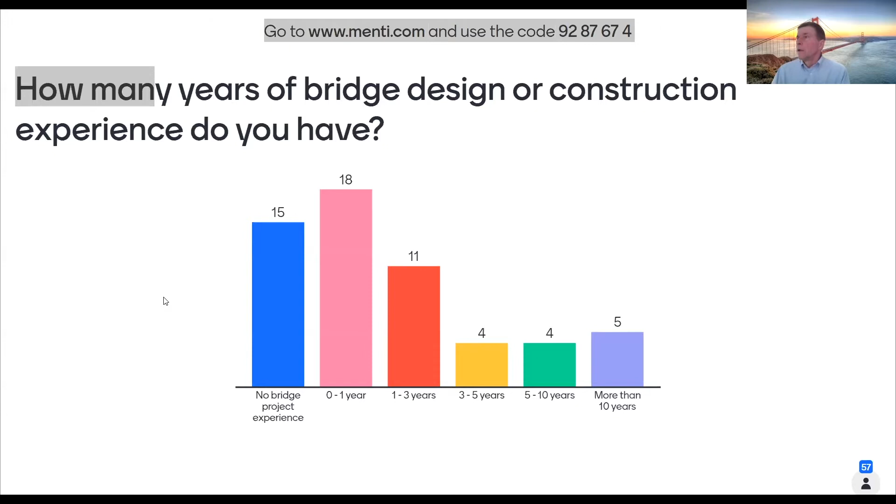So which MnDOT standard specification covers the majority of cast-in-place concrete bridge construction, placement and curing? The key words here are concrete, and also placement and curing.

The correct answer here is 2401, and we're going to be diving deep into 2401. When you get a bridge project, you're going to know 2401 inside out and backwards.

2461 talks about structural concrete, but it talks more about how to make the structural concrete—what are the different grades, what are the admixtures, some of that kind of stuff. There are some curing things that get into that, but the majority of bridge curing is going to be in 2401, and that was the intent of that spec.

So 1517 talks about claims. 2402 talks about steel construction—we are going to be doing that, Nick I believe is the one talking about some of the steel. And 2452 is piling, so those are things that we will be going through.

So again, as you move through the spec book and start doing more on bridges, these are the kinds of things you'll get really familiar with—what's 2401. In fact, you'll be able to pull out 2401.3 G2 and things like that.

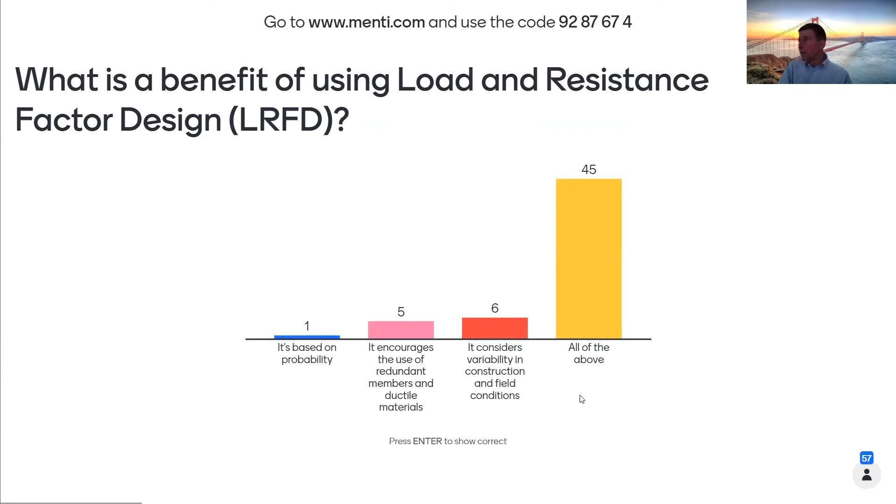What's the benefit of using load and resistance factor design, LRFD? It's based on probability - that's true. It encourages use of redundant members and ductile materials - ductile means it's not going to be quite so brittle. It considers variability in construction and field conditions - yes, that's true too. But the correct answer is all of those. Ben is going to be talking about those later this morning.

Deck pour sequences and construction sequences shown in the plans can be changed without contacting the engineer if the contractor signs off on it - that is false. There is a reason that the plans indicate something; it's there for a reason. If they change it, some things, even construction elevations, might change if you pour the concrete in span 1 and let it cure. Then when you pour span 2, it's going to deflect much differently than if it was non-composite. We'll talk about some of those kinds of things as well.

Which of the following can be used to determine the capacity of a CIP pile - cast in place pile driven in the field? Select all that apply. Pile sounding method - that's just a term I invented, so that's not a real term. MPF12 formula - we will be talking about that, and Andy will go into that. That's the main formula we use in the field now. It's a dynamic formula, and MPF12 is one correct answer here.

Allowable stress dynamic formula - we used to design and control things with allowable stress methods, but we no longer do. That LRFD question from a couple slides ago is some of the basis for this kind of stuff. Pile driving analyzer - yes, that's a tool we now have to analyze as you're driving; you hook up gauges and can tell what the capacity is. WEAP is used before the pile is ever driven, to qualify our pile hammers, so that's not the correct answer, nor is LRFD, which is used in a lot of things but not to control our piles. So the answers are MPF12 and pile driving analyzer.

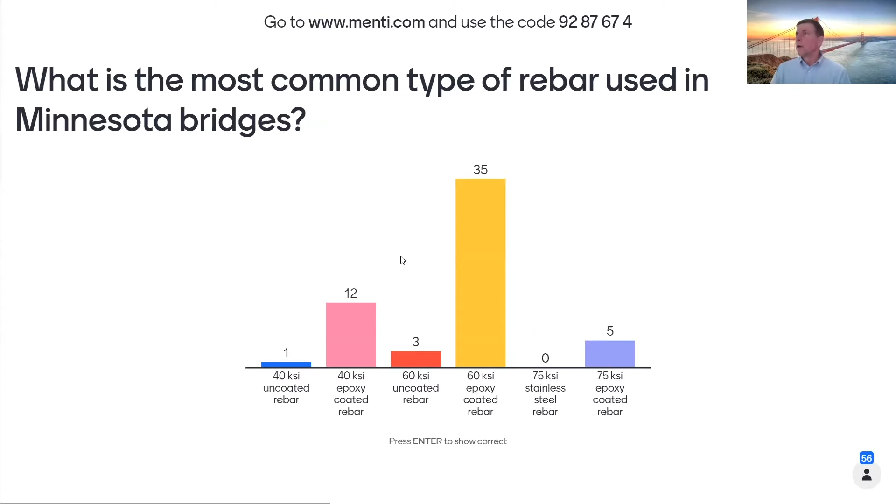For an HP 12 by 53 pile, what does the 53 designate? Okay, so we have length of pile in feet - no, that's not what it is. The HP 12 by 53 is the sectional properties of the pile, and the weight of the pile in pounds per foot is the correct answer here. So an HP 12 by 53, if you think of the H, if you go from flange to flange, that's 12 inches, and then you cut 1 foot of that length of pile, it would weigh 53 pounds. So the other option, the dimension of the pile from flange to flange in inches, is incorrect - that would be 12. And the dimension of the pile from flange to flange in millimeters, no, because if this was a metric designation this number would be 12 times 25 or something, so it'd be a bigger number. So again, HP 12 by 53, the 53 means pounds per foot.

When ambient temperatures increase, the expansion joint opening does what? So we got to think about what's happening to a bridge. The temperatures get hotter, what's going to happen? The bridge is going to get longer, so that's going to tend to make things at the end narrower or decrease. So most got that right, that the joint would then decrease.

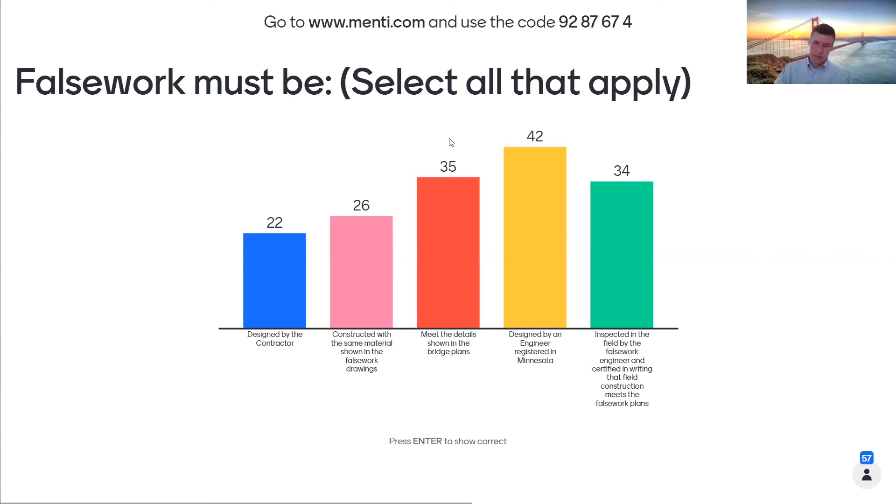Constructed with the same material shown in the falsework drawings - yes, that is also true. The falsework drawings are prepared by the contractor, and so the falsework must be constructed with that. Now this one, meet the details shown in the bridge plans, that is not correct. I suppose it's possible there would be a bridge plan where falsework is shown, but it's almost never, so this is incorrect, the middle one.

Designed by an engineer registered in Minnesota - yes, that is true. So this falsework designer hired by the contractor is someone who is registered in Minnesota. And then the last one, inspected in the field by the falsework engineer and certified in writing that field construction meets the falsework plans - that also is true. So actually the only one that's not true here is the middle one. All the other ones - designed by the contractor, same materials, engineers registered, and they inspect it and sign off on it - all of those are correct.

Which of the following is true for bar number B915E? Okay, so we have different designations, and we will get into this a bit. The B is often, where is it on the bridge. The 9 is the number and the size of the bar. The 15 is kind of a numerical placeholder. So the correct answer is the 9 would be in 1/8 of an inch, so it's 9/8 of an inch. So we know that much. The other thing we know is the E means it's epoxy coated.

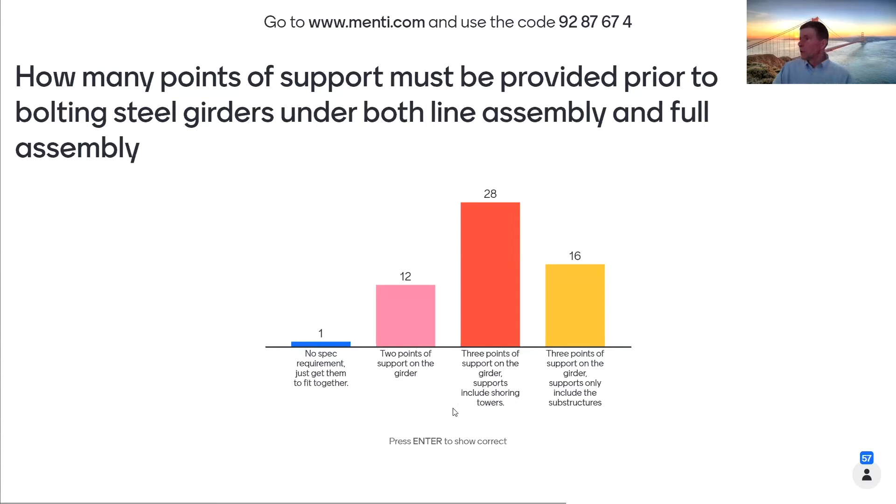MnDOT spec book allows these options for controlling bolt tensioning in the field. Again, select all that apply. Turn of the nut is allowed. It's a method that's been around for years, but it's still valid. You tighten the bolt up to a snug tight fit, and then you go a certain number of turns or portions of a turn, depending on the size of the bolt. Snug tight alone is not correct. You get it to snug tight, and then you do turn of the nut.

A direct tension indicator is one that's used often nowadays. So these two, direct tension indicator and turn of the nut, are allowed. This one, inspector closely observing tightening procedures on 50% or more of the bolts, no, that's still not correct. The spec book allows turn of nut or direct tension. If they're using turn of the nut, I suppose the inspector should be on site to watch their procedures, but by the spec book, that option itself is not allowed.

Field welding can be performed by persons who, select all that apply. They must be certified by AWS for the weld procedure being done, and they must have documented work on similar welds within the past year. All these other options, like more than 5 years welding experience, that's good, but have you done that specific welding procedure? Have you done an overhead fillet weld, or whatever the case may be? Graduated from a tech welding program, certainly wonderful, but you still need to be certified by AWS and have been on 3 or more bridge projects in the past year. If you haven't done the welds, it still doesn't apply.

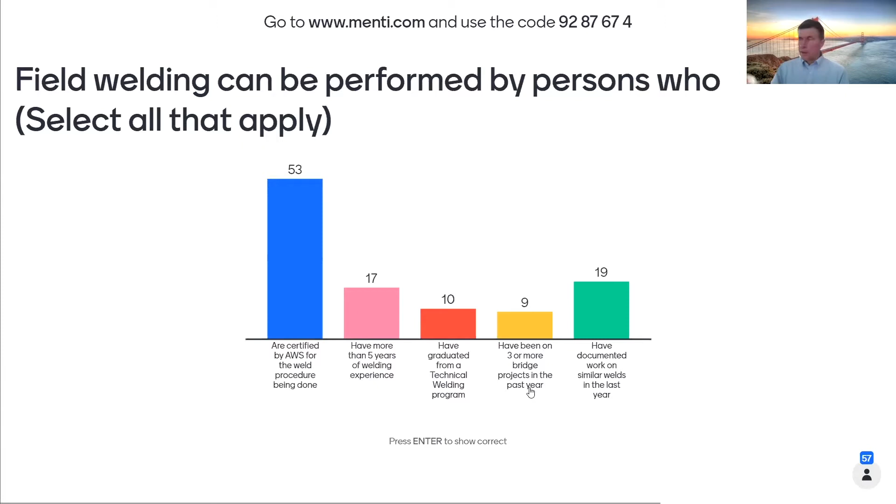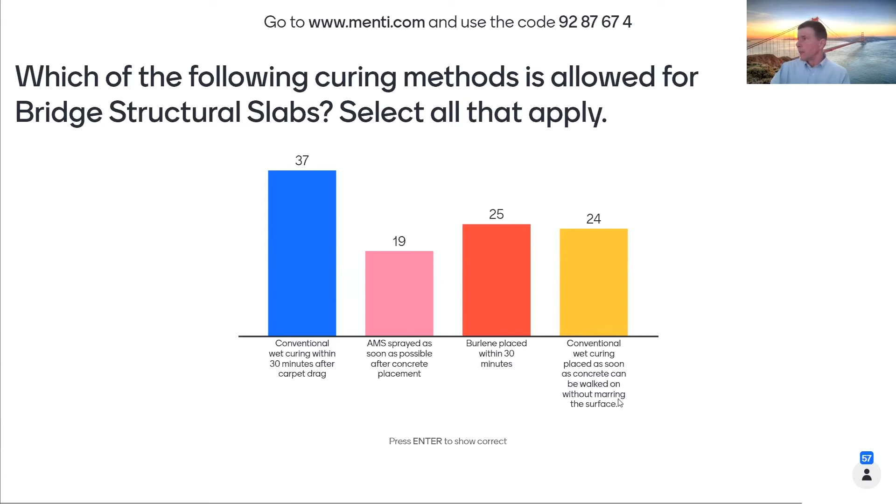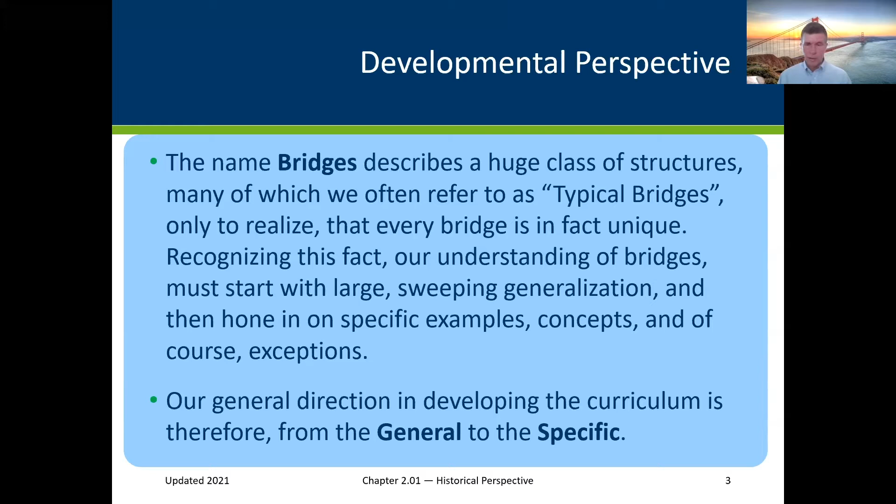So we're going to move from the general to the specific, meaning we're going to talk in general about what a bridge is, then some of the materials, and then concrete - how do you produce concrete, how do you cure concrete. Things like that, so we'll get down into some specifics as we move forward.

Those of us who think back to our childhood - who didn't make some kind of a little bridge over some little trickling stream? So that's the start of a beam span. That's the start of bridge construction.

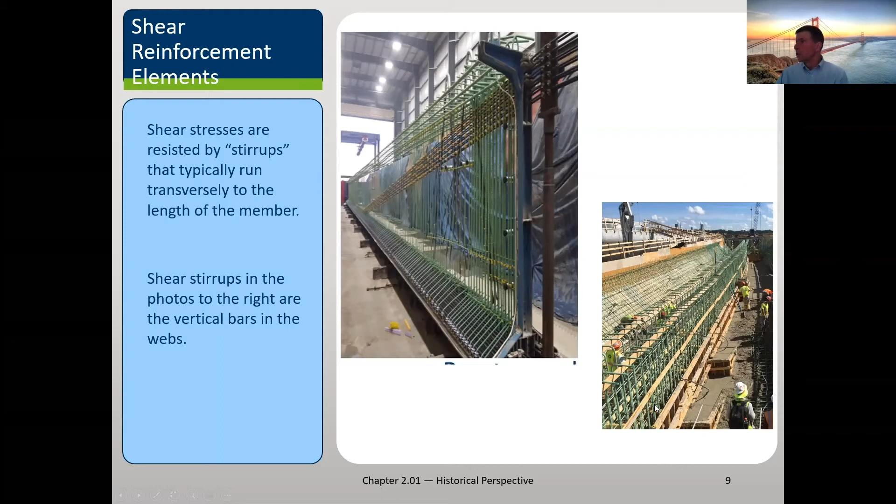Shear is addressed through the use of what are called stirrups. Oftentimes shear would manifest itself by a crack that goes diagonally. These bars that are vertical are called shear stirrups or shear bars, and the same down in the bottom right picture—those bars are also called stirrups or shear reinforcement.

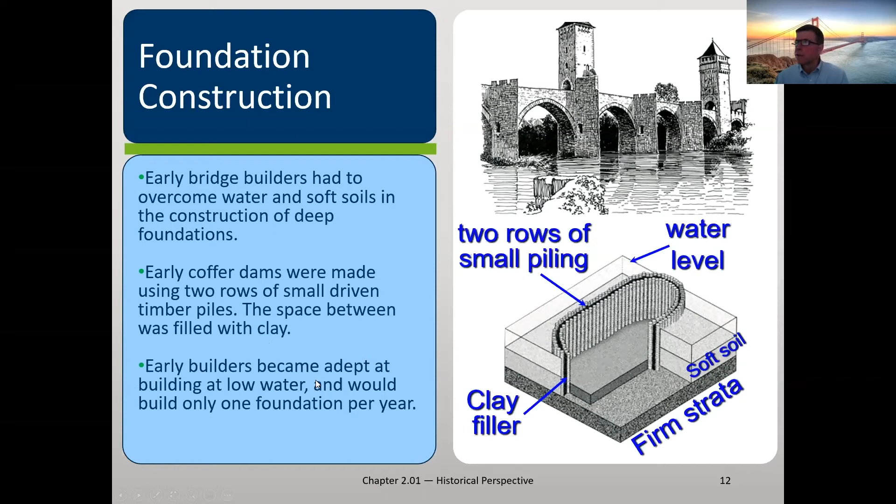The early builders became adept at building this, but they would wait for low water and maybe do one foundation a year—so you can see that bridge takes a while to build.

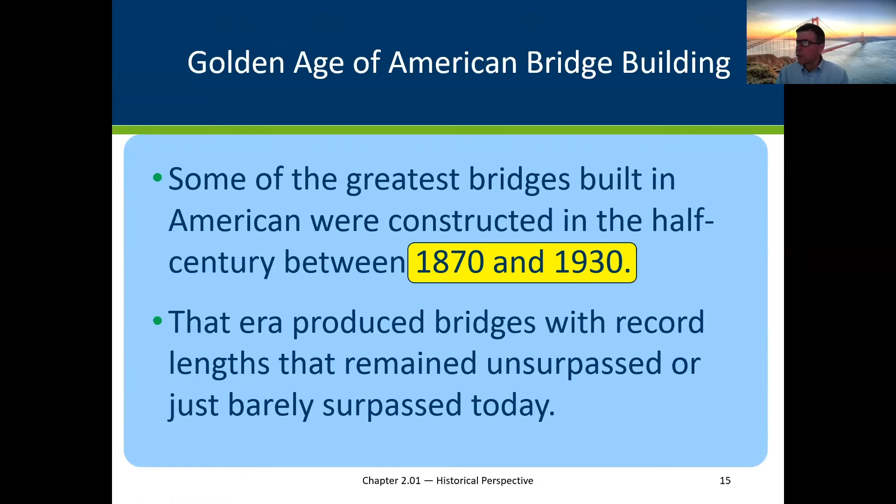But some of the greatest bridges in America were constructed in these years, between 1870 and 1930. There were record lengths, and the next slide will show they haven't even been surpassed by that many bridges since. So you're looking at that 50-year time frame.

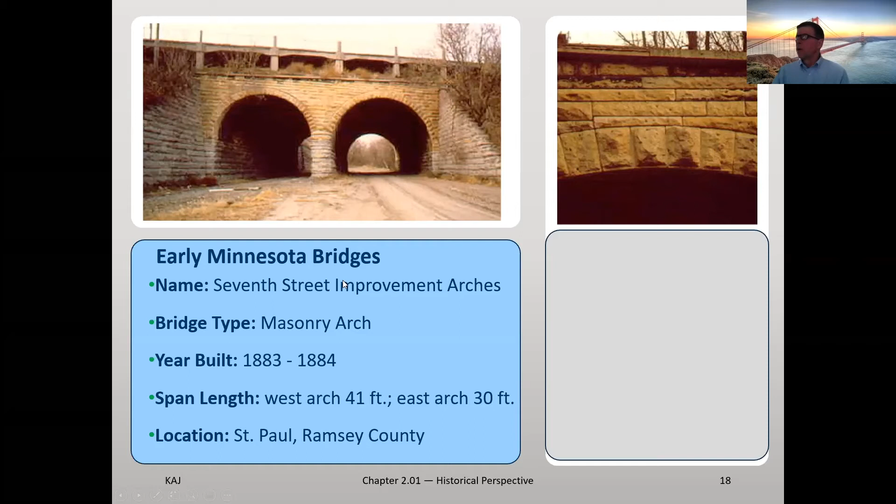Some other bridges, the 7th Street arches in St. Paul. So again, we see arch construction was kind of big back then, and they did a lot of bridges with them.

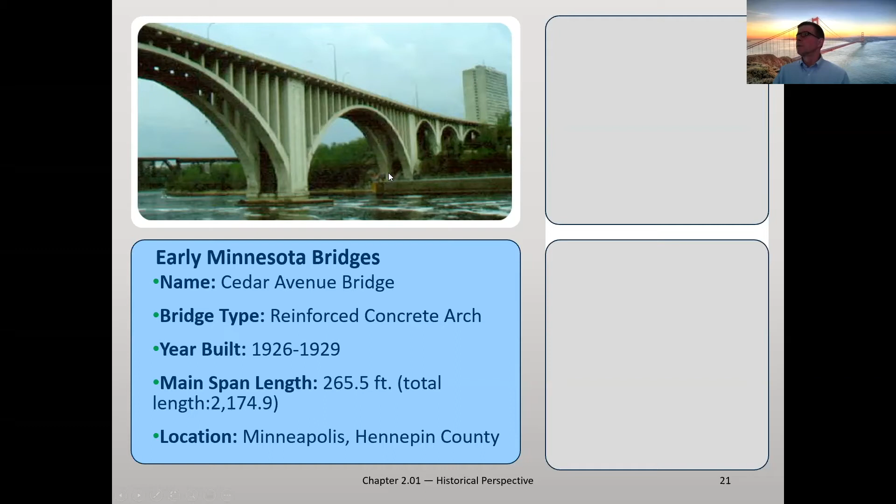This was a reinforced concrete arch, so we see a lot of these ones with either open or closed spandrel columns and the arch ribs. Got 265 feet on that bridge. The Robert Street Bridge, this is really an interesting one. There's actually structural steel inside of these arches, and then it's encased in concrete. So those are things that are done as well.

So what about historical construction management? You folks are going to be in construction management, at least a lot of you will. What has happened over the years?

Here's one, the Firth of Forth Bridge, famous bridge over in Scotland, built in 1890. It took 7 years, 1882 to 1889, to build. Looking at some of the information, at least 57 men died during the construction, and possibly as many as 73. So that's like 10 guys a year almost, 7 to 10 guys a year.

Piers were made of granite. They took 3 years, but it's a cantilever construction. And it's also the first major structure built of steel, not of iron. You can see all of the lattice lacing and so forth that goes on there.

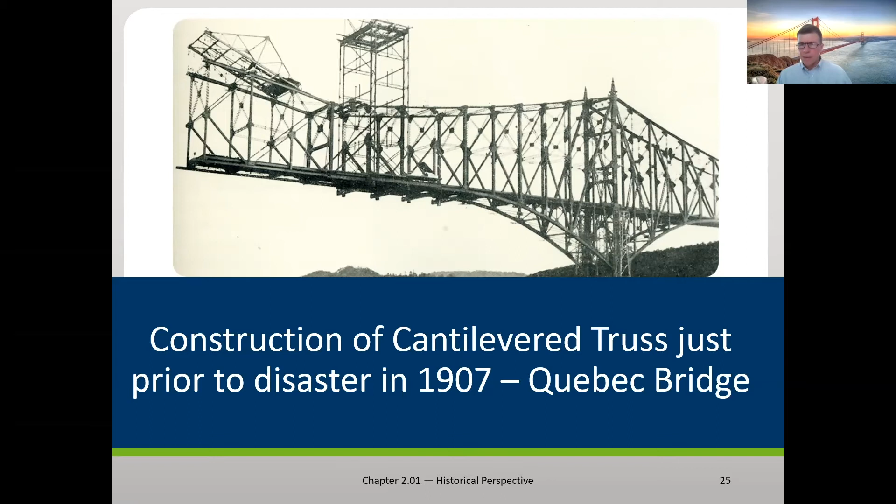A lot of times it is construction techniques. There have been a lot of disasters over time. This was a Quebec bridge in 1907. There was actually just a presentation at the University of Minnesota talking about the history of some of these tragedies in bridge construction and how every 30, 35 years something tends to happen. As we get more complacent in what we're doing and forget about the need to look at some of the details, things can start to happen. So just some pictures there of what happened.

But the need for construction management of bridges is not a recent development. As they were going out there, you have to support the cantilevers and support everything so that it can go together well.

Brooklyn Bridge, there's just a ton of information on the Brooklyn Bridge. John Roebling, top right, was the driving force. He designed it. His son took over, but his son actually ended up getting injured on the project working underneath the water. 1883, and it took 13 years for construction. The main span is 1,600 feet.

But this is what they did back then. The caissons, they lowered stuff down, and workers would come down the shaft through an airlock system, but they'd be working down there, and they actually got some of them the bends. Decompression sickness suffered from exposure to conditions of high pressure. So even though they were under the water, they were working in the dry, but there's high pressure down there, and they suffered what's called the bends.

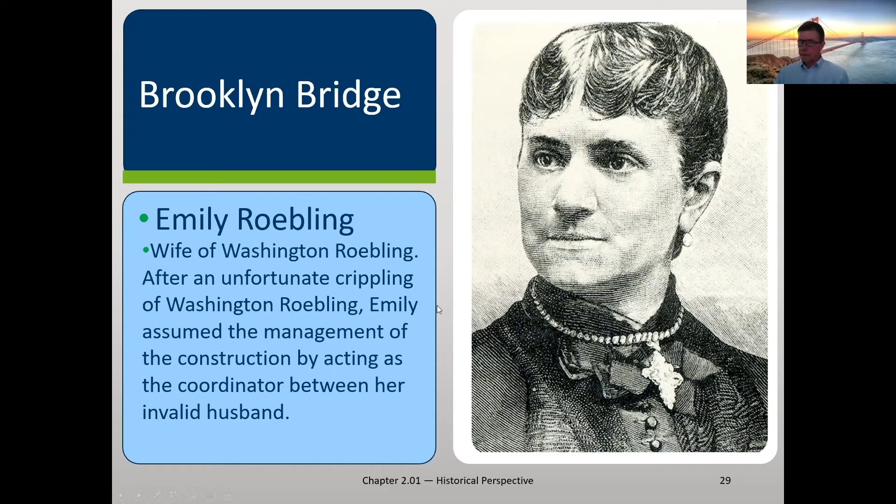And so when Washington Roebling went down, his wife, Emily, assumed the management of construction, and she kind of coordinated between them. So just a lot of interesting lessons in history when you think of it.

But the guys that were working down here, they're called sand hogs. There's some really interesting information of how they would make that with compressed air, a blowout pipe, but there'd be an airlock to get down there so that they can work without the water coming in and drowning them.

Quality control became apparent on the Brooklyn. The supplier of the wire was caught in a scheme to supply substandard wire, and so the cables on one side are larger than the cables on the other.

Okay, so what's going on? What's changing? The world is changing. Bridge construction has always been a complex undertaking. I worked on the St. Croix Bridge. It's complex, extremely complex. There's a lot of details that go into it, but it's always been that way.

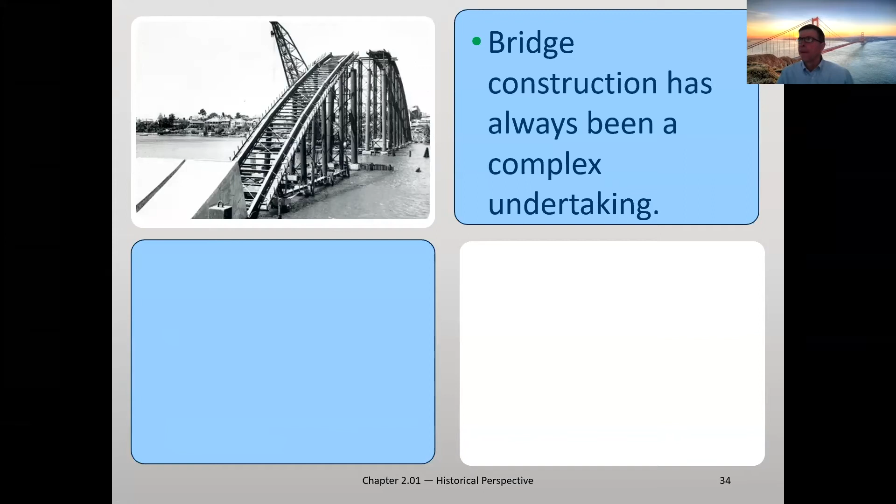So to be in construction engineering, you need to understand what are the forces, what are the loads, what's going on. The contractor wants to do something one way. Can you say yes right away, or do you need to say, hold on a second, we got to think about what's going on? So just a reminder about that.

So today's bridge construction continues to be more complex. This is a bridge, I think it's from the Parkway, Blue Ridge Parkway in Tennessee. Beautiful area, beautiful bridges that were built, but you can see the box girders, everything fits together, and at the end of the day, it has to fit where it needs to go. So important to do that.

Lowry Avenue Bridge, very complex pier shapes. You almost have to have 3D, and we're going more and more to 3D. At WSB, we're doing some design of bridges in 3D, and it's pretty interesting to be able to look at that and look at where are some potential conflicts.

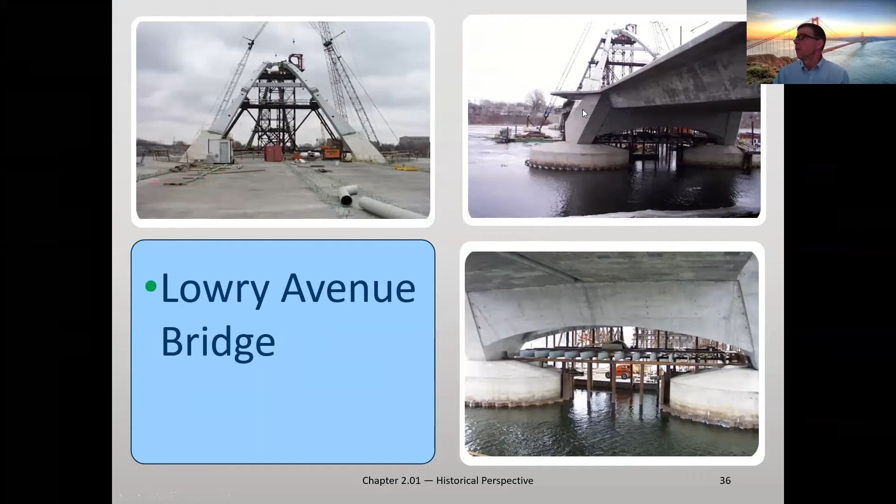Hastings Bridge, this one was incredibly fun to watch go up, it's a tied arch. It was built on land, about a half mile up the river on the Mississippi, there was a staging area, and they built this whole bridge there, and they moved it in. They had a system of cables to pull that thing up into place, and it was really incredible to watch.

Cayuga Street Bridge has a lot of complex geometry, with ramps coming in and out and things like that, so a lot of complexities. Lafayette is a big steel box girder, and these plans were prepared with both steel and concrete, and that was handled there.

St. Croix Bridge, I was on this project, and again, an awesome project to be involved with, but very, very complex.

What are the goals for this chapter? We want to understand some of the words and terminology. We mainly deal in steel and concrete. Steel can be steel beams and girders, it can be high strength steel, it can be reinforcement bar, different grades of reinforcement bar, 60 KSI, epoxy coated, stainless steel which is typically a little bit higher, or pre-stressing strands.

Concrete can be many, many different grades. As Maria comes in to talk about concrete, you'll see there are many different grades of material. Concrete can be cast in place or precast, and precast is often in a fabrication plant, sometimes on site in some facility, but mainly in some type of plant.

All of these materials, steel and concrete, get combined into structural components, which sometimes we call elements. Elements are things like beams, pier caps, columns, decks. Those even form an array of structural systems, which might be the superstructure, the substructure, things like that.

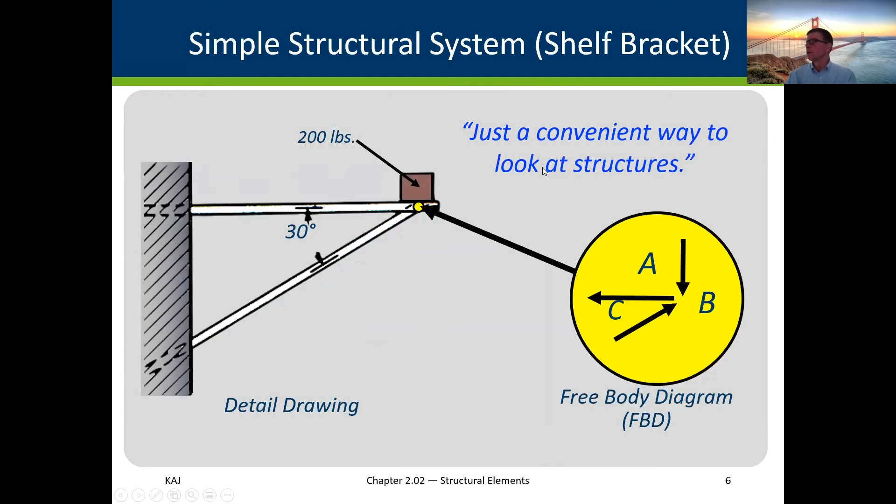So what we would see from that is, if we put a 200-pound force on this, it's going to manifest itself into some tension and some compression going on in that element. This little thing is a convenient way to look at structures. But the point and magnitude of that force—so now we have 200 pounds coming down here—has to translate itself through this member to get into the wall so the shelf doesn't fall down.

So you have a 200-pound vertical force going downward. You then have a tension element, and as mentioned, if you're going to fasten this to the wall, this is going to be important. Why? Because it's a tension element—it's trying to pull apart. So a little depiction would show what it is.

So what's the magnitude of that thing? You use all of the things we've learned in geometry, algebra, and math to depict our numbers. In this case, you'd use our formulas to show the magnitude is 346 pounds, or as mentioned here, negative 346—so it's a 346-pound tension. A 200-pound load here makes a 346-pound tensile load here.

What about the compression? We do the same thing—that's 400 pounds, so now you have a 400-pound compression going on there. So we see the 200-pound load, when it has to be put into elements that are horizontal or diagonal, those forces actually increase in that situation.

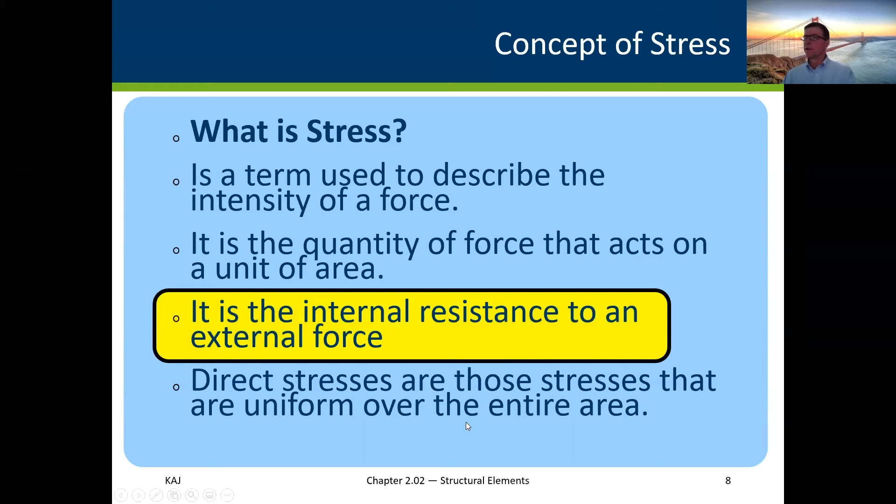So the concept of stress, using this little lowercase f as a symbol for stress, is P over A, which is the axial force. The P is designated as a force, over A, which is the area of the material that you have. Here is just what those symbols mean—so just basic engineering formulas are shown right there.

So why do you, as a field engineer, need to know that? Because you need to know when somebody wants to use a different grade of rebar or a different grade of concrete—it makes a difference, because the engineers have calculated it to be for a certain amount.

Here's a depiction: if we have a 6,400-pound block on top of an 8x8 post, what kind of stress is on there? You take the area, 8x8, so that's 64 square inches. Then you take the load of 6,400 divided by 64 square inches, you get 100 PSI. In material engineering, we'd ask, is our block able to withstand 100 PSI? It's not a very high stress, so we'd probably say that's good to go.

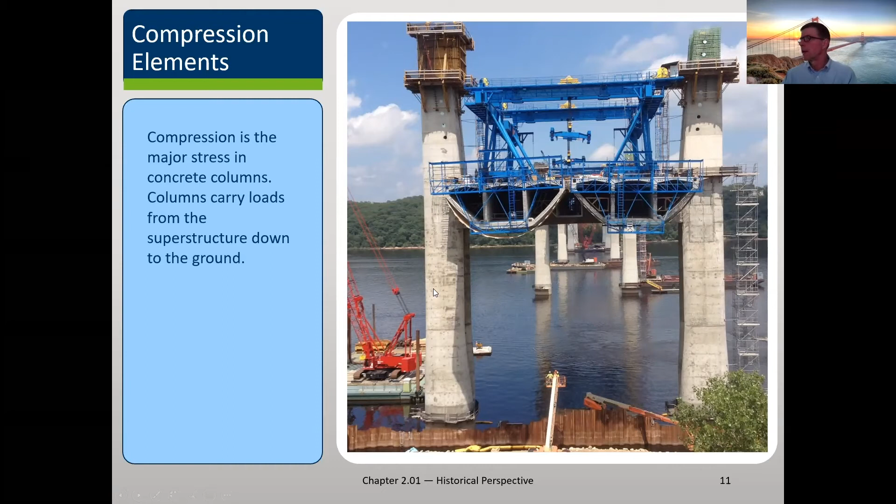As a result, there's a lot of shear reinforcement. You need to watch the buckling. There's a lot of things we design there. Tensile force - so here it's...

It's a 1,500-pound load with a half-inch diameter rod. Again, stress is the internal resistance to an external force. The area of a half-inch rod - you do your pi r squared, or pi d squared over 4, to get the area of the rod, and then you can calculate your tensile stress. So in that case, 1,500-pound weight divided by that area, you calculate 7,655 psi, or that's the same as saying 7.65 ksi. We see the terminology often used in bridges is ksi, just to make the numbers more manageable. But it's the same - 7,600 psi is the same as 7.6 ksi.

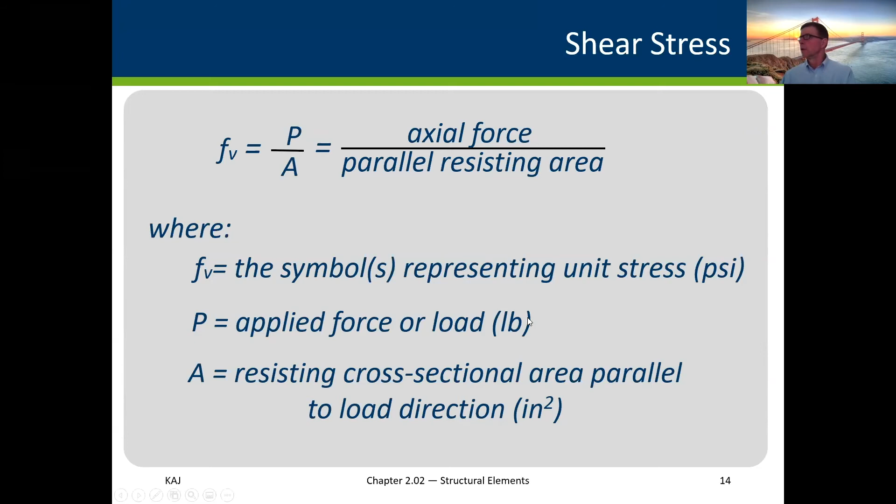Shear stress - so this is one where, if we have a beam, there's what's called a shear stress at the ends, and it's the highest there. It's kind of the parallel area, so it'd be whatever the area of that beam is. The unit stress is shown as this small case f with a small v, but again it's the P over A. You see that similar formula coming through all of these things, but in this case it's the area of the shearing force that it's trying to pull apart.

So here's a case of a rivet or a bolt. These plates, if this is in tension, are trying to pull apart. The purpose of a bolt is to clamp those together so they don't pull apart. Then you can do calculations to show what's the force in there - in this case, 5,000 pounds. You can calculate the area of that 3/4 inch rivet is 0.44 square inches. Do the math and you get 11,000 psi is the stress that's going to be in that rivet or bolt.

So we had shown this picture before, but again, shear stirrups are used to withstand those shear stresses.

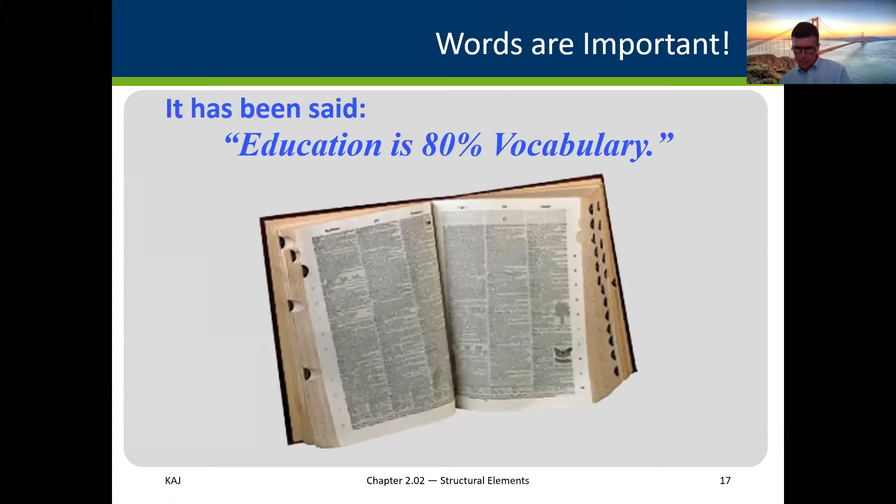Vocabulary is a lot - it's said education is 80% vocabulary. So what do we know about our bridge terminology? Let's talk about strength - strength of material is its ability to resist forces. Again we see these things coming back time after time: compression, tension, shear. Those are things that need to be resisted, and we're designing and building bridge elements to be able to resist those forces.

So the ultimate strength of material is the unit stress that causes failure. I think a lot of you have probably gone through engineering school and seen some of those formulas - for instance with steel, the curve would go up, then it kind of tapers off, and then all of a sudden it falls off. Well, that's the ultimate strength - it can't take any more load until, boom, it fails. That's the ultimate strength of the material. Same with concrete - concrete's not very good in tension, but it's good in compression. What's the ultimate strength of that stuff before it would break?

Sometimes we use terms like elastic and plastic. There's a couple of slides here.

Elastic is applied to the greatest unit stress a material can resist without a permanent change in shape. So if we have a steel beam, for instance, and we drive on that and deflect it down, if it's still within that elastic range, the vehicle goes over and it bounces back up. Or we have a tension member on a truss, we pull it and it deforms a little bit, but it doesn't elongate and not go back. So we want to stay within that elastic range.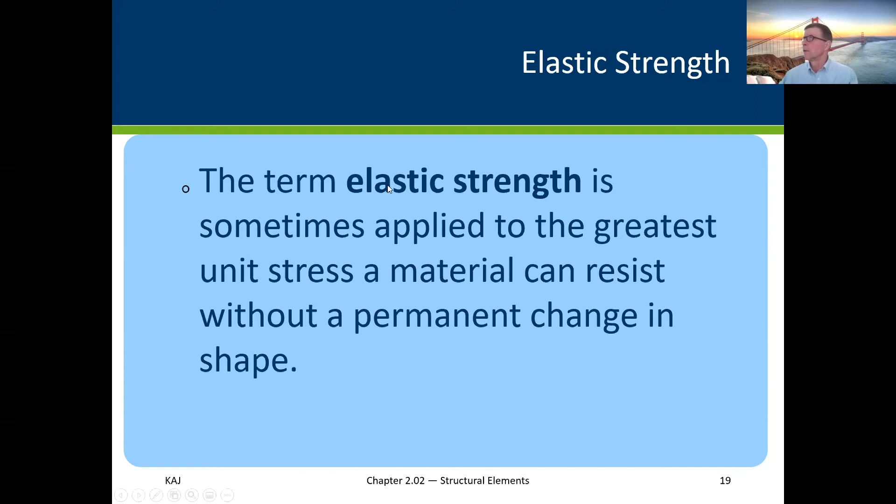Stiffness enables a member or an element to resist deformation. So you can imagine if there's a block of wood and a block of steel of the same size, and they have the same compressive load, the wood block would become shorter and it would compress. That's just because of the stiffness of the member. So the stiffness of wood is maybe 30 times less than steel.

Elasticity then is a property that enables it to return to its original size and shape. With many materials, there is a unit stress beyond which it doesn't regain its original dimensions. In fact, we'd probably say everything does. Sometimes there's brittle failures, which we talk about, and so forth. But again, that elastic limit, we want to stay within that elastic limit.

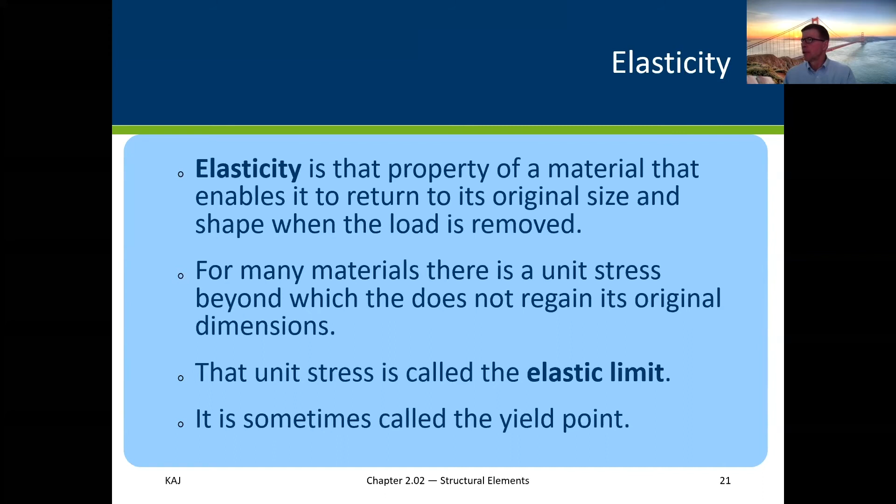Sometimes that's called a yield point. Plasticity is the opposite. It's a perfectly plastic material that doesn't return to its original dimension. So, like kids at home playing with Play-Doh, they squish it and it stays in that shape. That's perfectly plastic.

Ductility is something that in bridges we want to know, especially in steel. What is the ductility of that member? It's a property of a material that permits it to undergo plastic deformation when subjected to a tensile force.

We want to know what our material is, so the properties of steel, we need to know what that is. So when a body is subjected to a force, there's always a change. Those are called deformations.

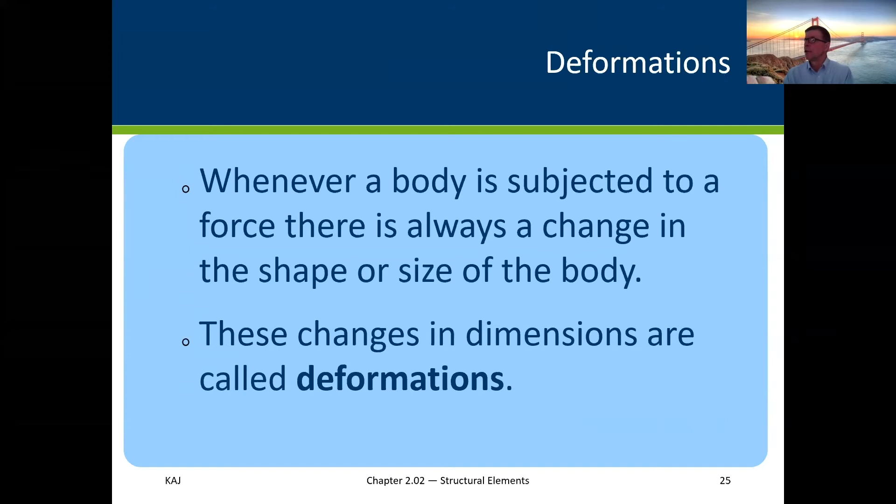So again, a block subjected to a compressive force shortens in length. If a tensile stress comes, it's going to make that thing be a little bit longer. And if you have a beam, here's where the deflection, the bending comes in, but there will be a deflection that happens. As we talk about superstructure elements, we need to be able to predict that deflection.

So whenever there is stress, there is always an accompanying deformation. Sometimes it's so small we don't even see it, but that is called strain. And we often use the phrase stress and strain. We're not going to overly worry about that, but they kind of go hand in hand.

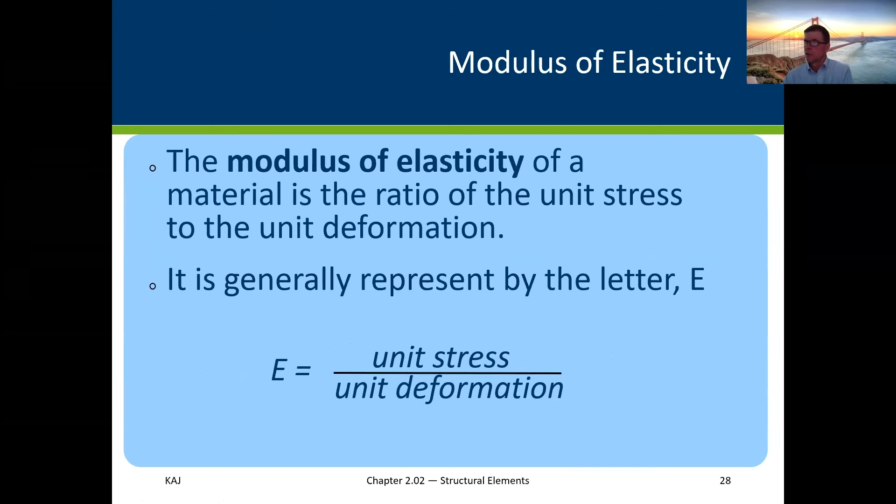Modulus of elasticity - in the field, you're not going to need to know this too much, but the bridge engineers need to know this for the properties, what the deflection is going to be, and so forth. It's represented by the letter E. Essentially, it talks about the unit stress over unit deformation. There's a lot of formulas that are applied.

So looking back again at those - bending does respond differently than the other elements. So let's understand it. What are some of the terms that we use? We need to understand the loads, the supports, what are the section properties.

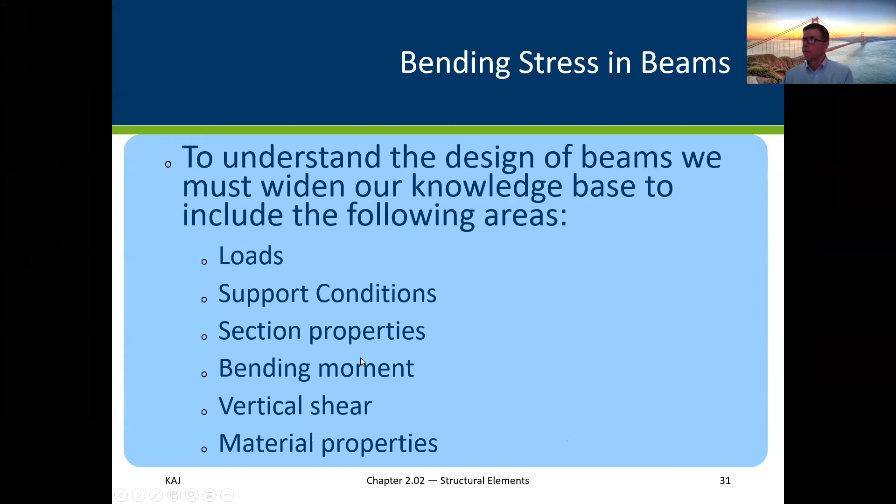We can calculate a bending moment, and some vertical shears and material which goes on. So loads can be classified with respect to time, and they can be classified relative to the area over which it's applied.

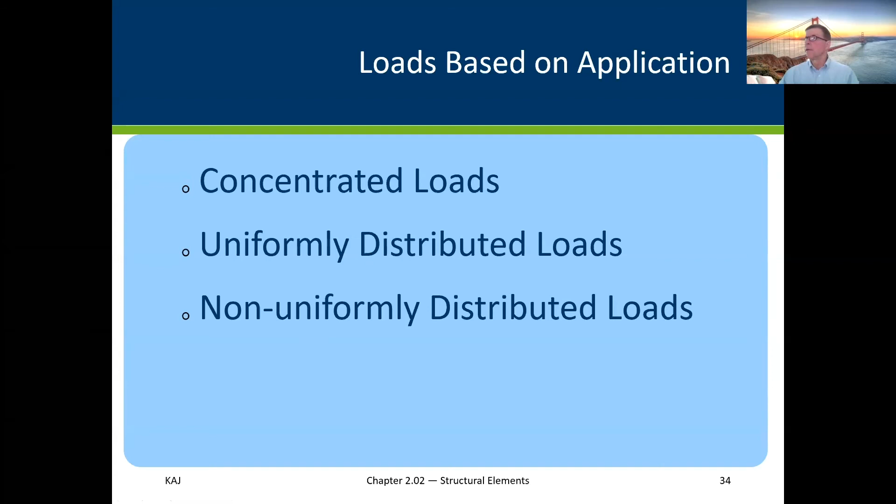We look at concentrated loads versus uniformly distributed loads. A concentrated load is like a wheel load. When we're designing a deck, we look at the impact of that single wheel load in that small area, and how those loads get to the beams. They can also be non-uniformly distributed.

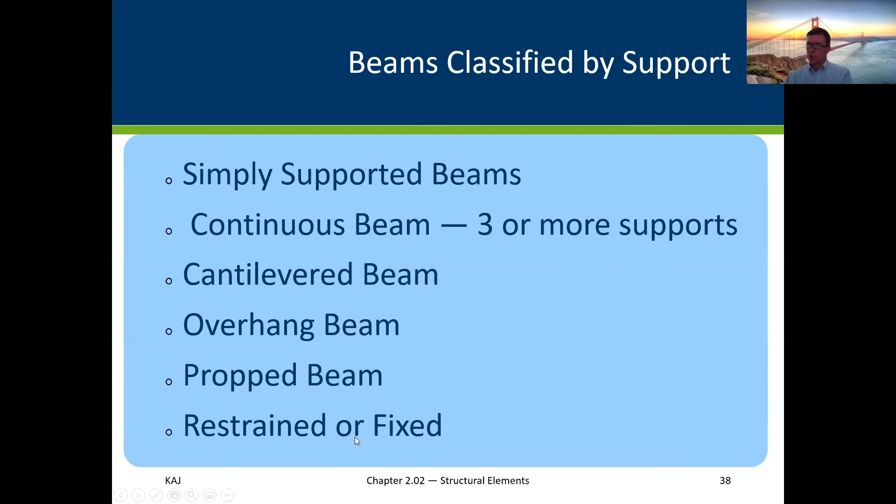Simply supported is just as it mentions, there's 2 supports. You have 1 beam, you have loads that are on that beam, and it's going to be a simple moment diagram and simple shear diagrams that would result.

But with continuous, you go across 3 or more supports, it actually becomes more efficient. We now have negative moment over the piers, positive moment in the center of the span. But they tend to even themselves out, so it won't be as big a positive moment, and you'd have small negative moment over the piers. So it can be more efficient for the same number of spans than if we had simply supported beams.

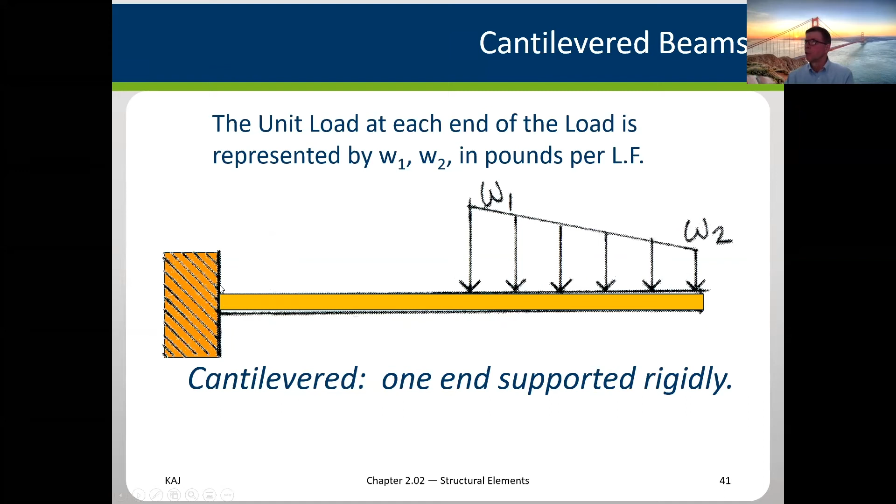Sometimes there are cantilevers, with a load out on the end, and there'd be some heavy conditions here that we need to be analyzing for.

What does that mean then to us in the field as construction engineers building bridges? It comes down to what are the members, what are the cross-sectional properties of the members that you are building. That means what's the area of our concrete, what's the area of our steel, what's the center of gravity, and also what's the placement of our reinforcement.

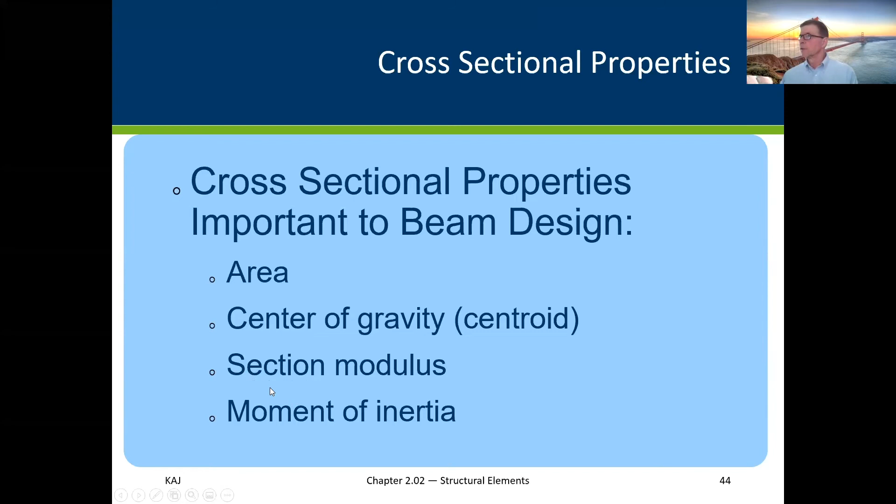There are things we'll talk about briefly, like section modulus and moment of inertia, that we need to know for things like deflection, for the stresses, all those kind of things. So we'll talk about that briefly.

So some of these are straightforward. On a triangle, it would be different dimensions of 1/3 from the base or 2/3 from the height. So in a simple beam, it's subject to this: the fibers above a certain plane are in compression, and those below are in tension.

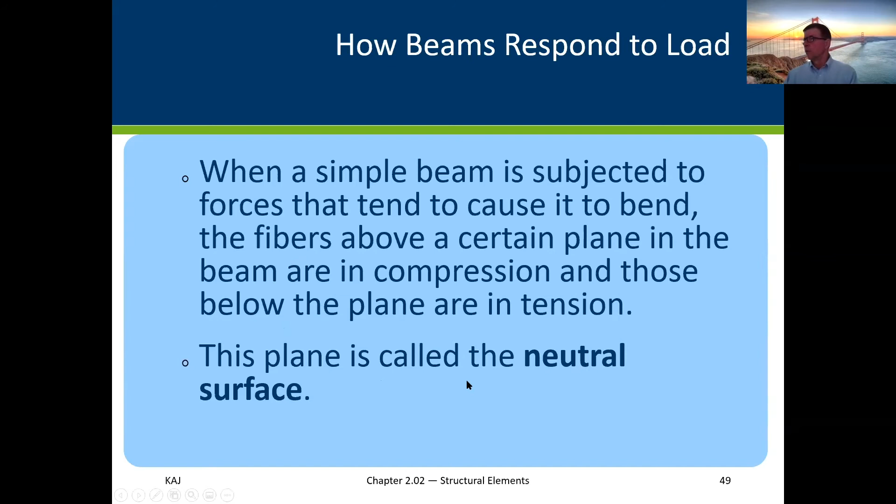This is where that neutral surface comes into play. Above would be in tension, or below, or vice versa -- above in compression and below would be in tension. And so here's kind of the neutral surface. This would be a rectangular block, tension down here, compression up here.

Our designers are designing for this case right here. We're designing for the extreme fiber stress. We also look sometimes, like on the St. Croix Bridge, on our deck section, we wanted to have zero tension so that we don't want cracks to open up. And so in the compressive zone, no matter what the load case is, we want to always maintain that it would be in compression.

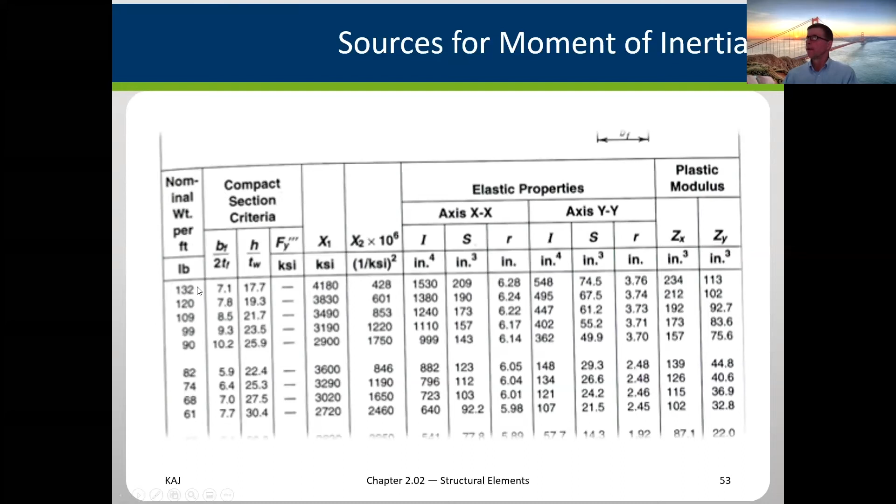Moment of inertia is really how that material can resist the forces, but there's different ways that we can find moment of inertia. One example is here for a steel beam, and there's moments of inertia that are shown here.

The thing we want to point out: this is a steel beam that's like an H shape, and there's a strong direction and a weak direction. So if you're ever looking in a manual for information on moment of inertia or section modulus, make sure you know -- are you talking about the x-axis or the y-axis? Are you talking about the strong direction, where your beam is vertical, or the other side? So just be aware of what that is.

So the moment of inertia there -- section modulus is similar, but now this is divided by the distance from the neutral axis. Again, you can look at the manual of steel construction or formulas to find that. And again, here it is.

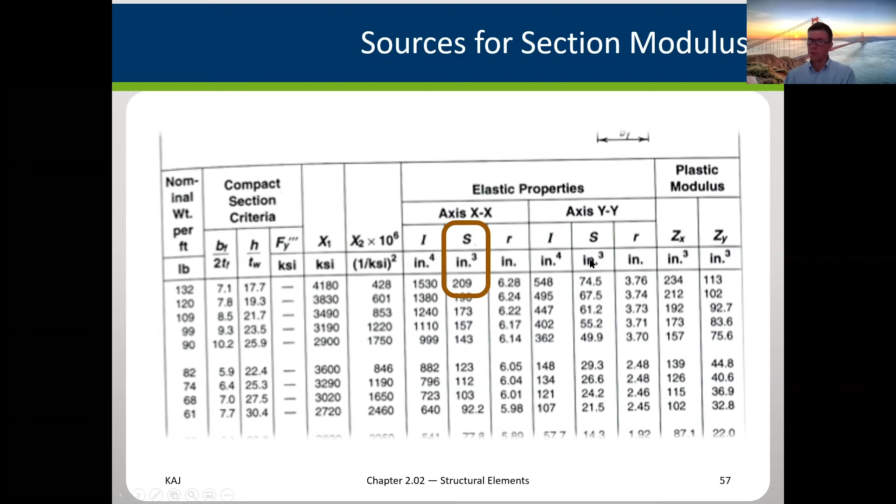But again, I do want to point out the difference. So here in the x-axis, the section modulus is 209 cubic inches, and the y-axis is 74.5 cubic inches. So you do need to be aware of what direction we're placing that member. There's formulas -- in college, this was a very common formula we used, B times D squared over 6 for the section modulus in the X direction.

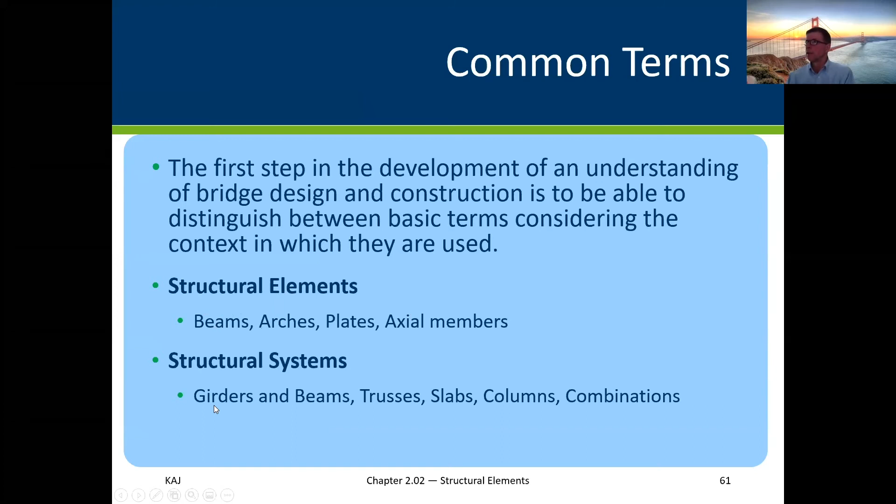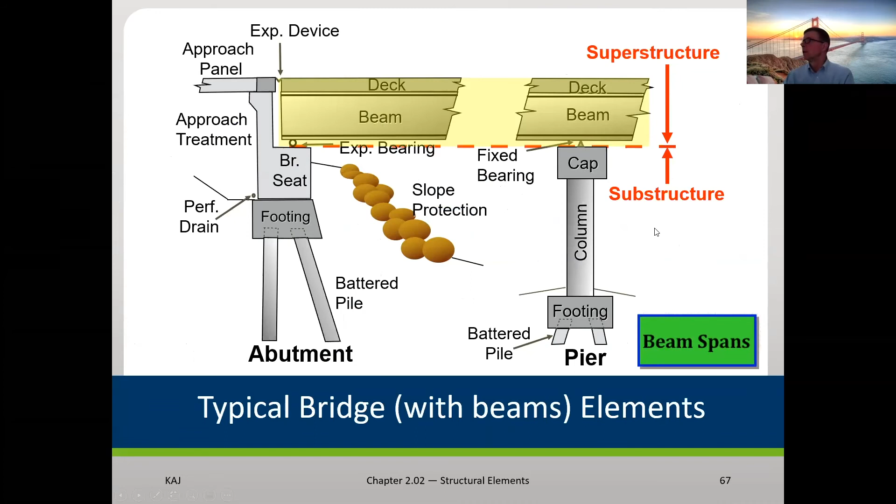So typically, we'd have a beam span like this. The superstructure is the bearings and above; the substructure is below that - the pier caps, the columns, the footings, and the abutments. So a couple terminologies that we use.

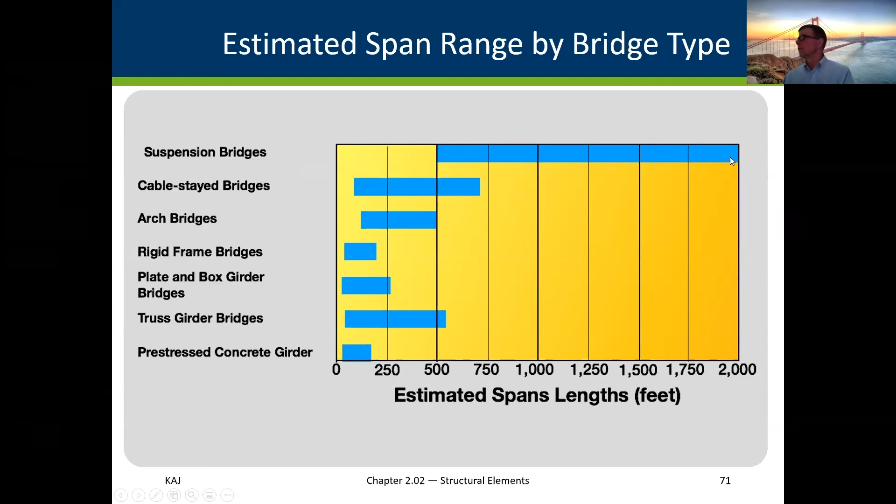So when we build these different bridges, how big can we get? Estimated span: pre-stressed girders get up to 180 feet or so, trusses can get 500, boxes can get up there too, and suspension bridges we saw were getting up to 6,000 feet. Just kind of shows what that can be.

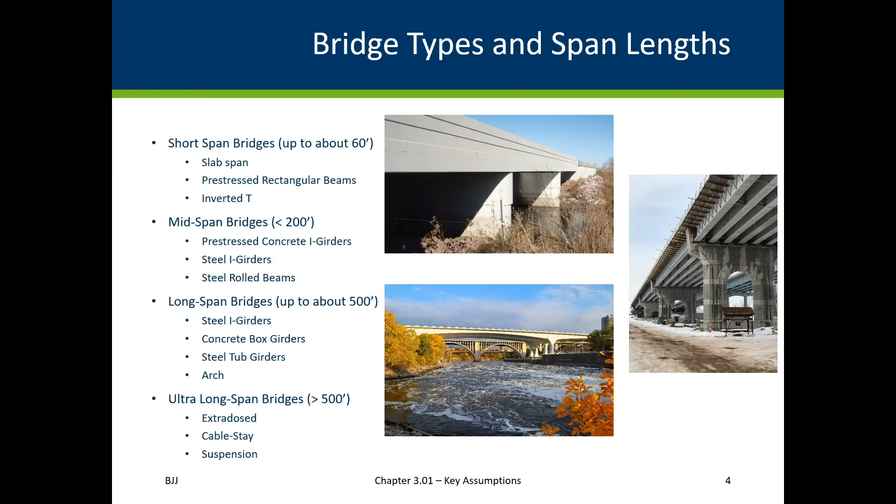When we design bridges, we have to follow a design code. The first standard specifications for highway bridges was introduced by AASHTO in 1931. These specifications have been updated many times since the original copy and have adopted different design philosophies over time. Original specifications used allowable stress design. Later designs used load factor design. In 2007, load and resistance factor design became the law of the land by decree of the FHWA and AASHTO. The current version of the AASHTO LRFD code is the 9th edition from 2020.

MnDOT has its own bridge design manual, which governs the design of public highway bridges in the state of Minnesota. This manual generally follows the recommendations of AASHTO, but gives additional requirements and sometimes different criteria from those specified by AASHTO. These differences from AASHTO are based on MnDOT's past experience as well as comfort level with design criteria. It also gives best practices and general rules and assumptions to make in design. Finally, the manual also gives many design examples on how the code is applied.

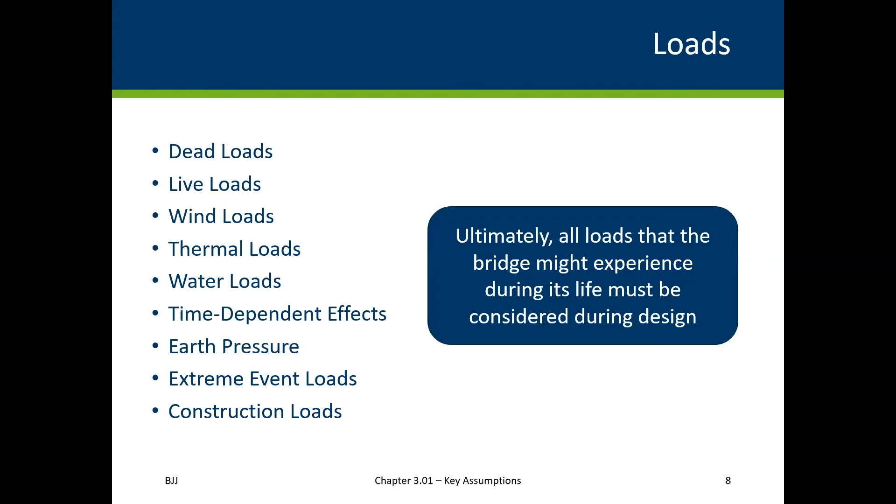Dead loads are a major load on the bridge. They have a constant magnitude and remain in one position or area. Basically, the dead loads on a bridge consist of the self-weight of the bridge, which include the girders, deck, barriers, and those sorts of things. Dead loads can act on either the non-composite section or the composite section. In other words, on the section before the deck is cast and on the section after the deck is cast, which contain different properties.

Once a designer has figured out all the loads acting on a bridge, they need to figure out which loads will act at the same time. In other words, what's the probability that all the different loads will be applied at the same time? This question has been addressed in bridge design with factored load design.

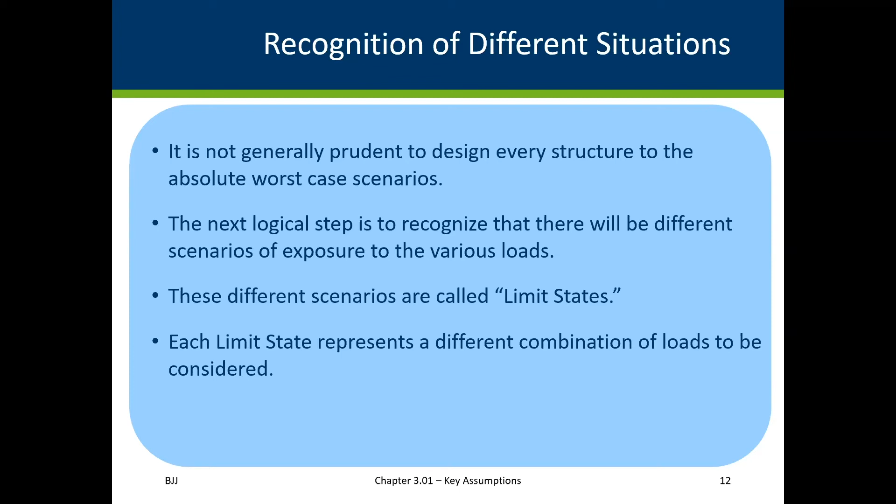It's generally not prudent to design every structure to the absolute worst case scenarios. In other words, it's not reasonable to assume that the full magnitude of all loads will simultaneously act on the structure at the same time. The next logical step is to recognize that there will be different scenarios of exposure to the various loads. These different scenarios are called limit states. Each limit state represents a different combination of loads to be considered.

Another factor that an engineer must consider is the safety factor. All of us have some concept of what a safety factor is and why it's important. The question is, how safe is safe, or how do we measure safety? The answer to both questions is, it depends.

Early in the history of engineering, the most common method of determining what is safe was the use of an allowable stress design, also called working stress design. It's a method in which the maximum stress a particular member may carry is limited to an allowable working stress. The allowable or working stress is determined by applying an appropriate factor of safety to the limited stress of the material. For example, the allowable tensile resistance for a tension member was 0.55 times the steel yield stress. This results in a safety factor of 1 over 0.55, or 1.8.

Here we see an example of allowable stress design. In this example, the combined stress is taken as force over area. If moments are taking place, an additional component is added. For the example, with a force of 64,000 pounds on a post with an area of 64 square inches, the stress becomes 1,000 psi. If the material has an allowable stress of 1,150 psi, the check for ASD shows it to be okay.

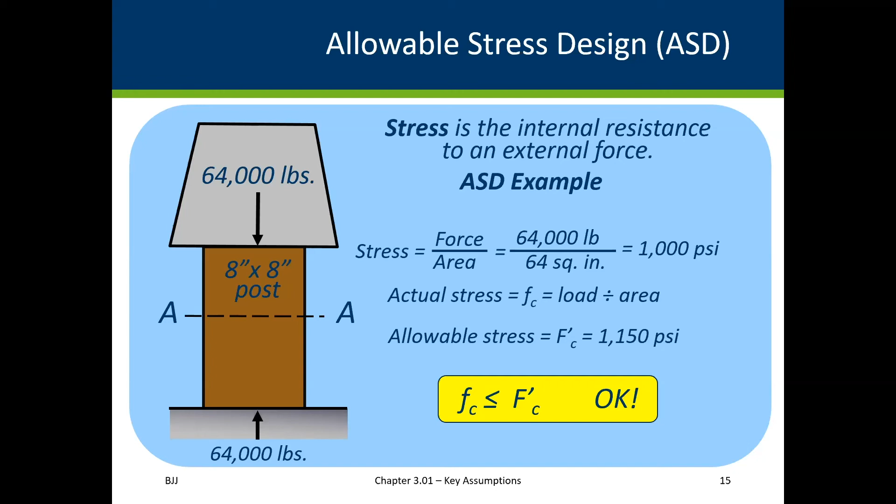There are limitations of the allowable stress design procedure. Let's say that occasionally additional loads might be placed on the bridge. These additional weights might just be for seconds, and some might not weigh very much. Let's also say that some of the posts used might have holes of various diameters drilled through them. The traditional allowable stress method of design did not have procedures for the designer to easily consider these probabilities.

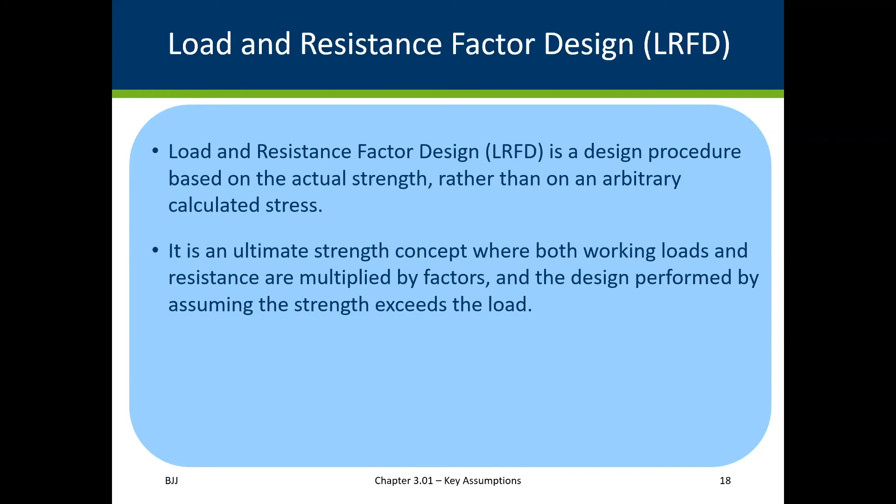The latest design philosophy, which is used today, is load and resistance factor design, or LRFD. LRFD is based on the actual strength rather than an arbitrary calculated stress. It is an ultimate strength concept where both working loads and resistance are multiplied by factors, and the design is performed by assuming the strength exceeds the load.

The underlying goal in design is for the capacity of the structure to be greater than or equal to the expected demand. The demand is affected by the type, magnitude, and placement of loads on the system and the interaction with the system's formal geometry. The capacity of the system is provided through a combination of material type, section, and formal geometry, and the system behavior under demand.

This table shows the load factors used in AASHTO for various load combinations or limit states. The load factor in the first column for the strength cases varies depending on what you are using and what behavior you are investigating. There are different load combinations for construction than for after the bridge has been open to traffic.

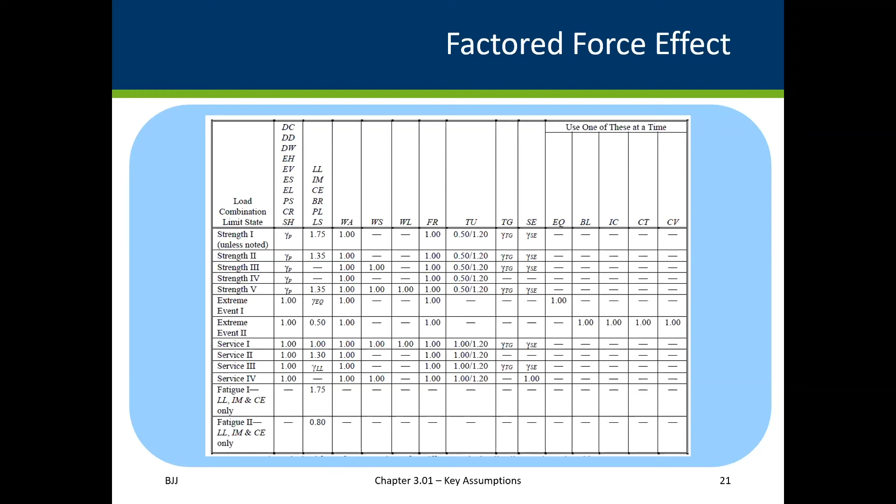The factored resistance in LRFD is taken as a resistance factor multiplied by the nominal resistance of the member. The resistance factor is typically taken less than 1. In the example post, the post has a capacity of P sub R to transmit a load of that magnitude from the top of the foundation.

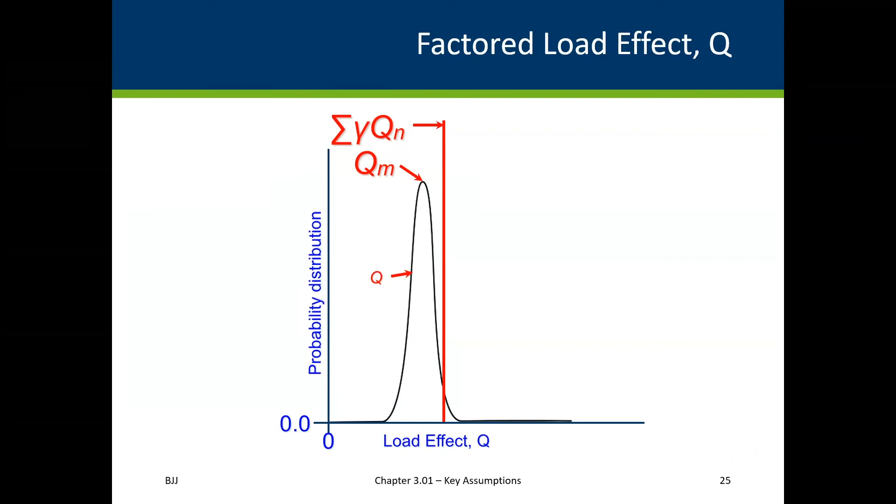Another way of looking at this is with what is called a reliability index. The reliability index is a way of looking at failure probability and considers the load effect and resistance. In AASHTO, the strength 1 load combination is set to have a target reliability index of 3.5. This equates to a probability of exceedance in the 75-year design life of 0.02%.

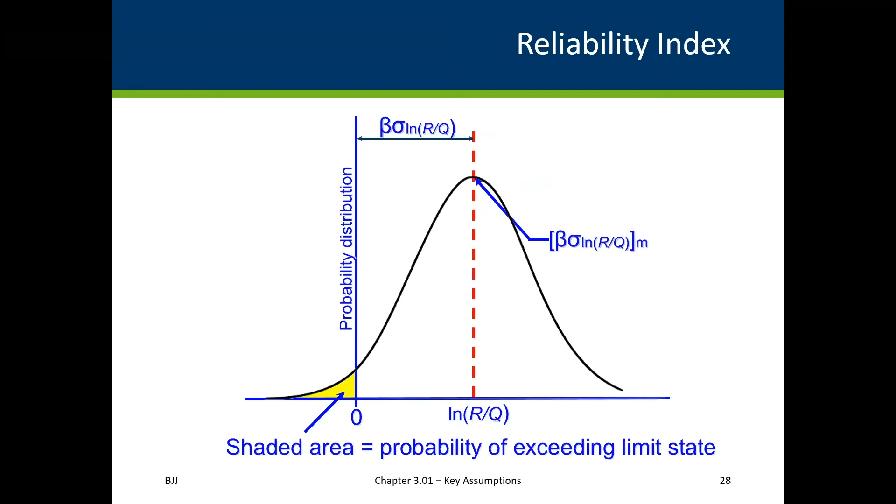There are many benefits to using LRFD versus ASD or LFD. First, it is based on probability, so you know more precisely the safety factor that is being applied in design. Because of this, it will encourage better designs. LRFD encourages the use of redundant configurations and the use of ductile materials. It also encourages the use of materials with low variability. Finally, it considers variability in construction and field conditions.

Now let's look at some examples in bridge plans where we can see evidence of what was assumed in design. Looking at the front sheet of a bridge plan, there is a box in the upper right corner. This box contains basic data that was used in the design of the bridge. It gives the design code used, design methodology, live load assumed, other load allowances, and materials assumed. In some bigger bridge plans for more major structures, there are additional sheets in the plan which go into more detail on assumptions made for design and design criteria.

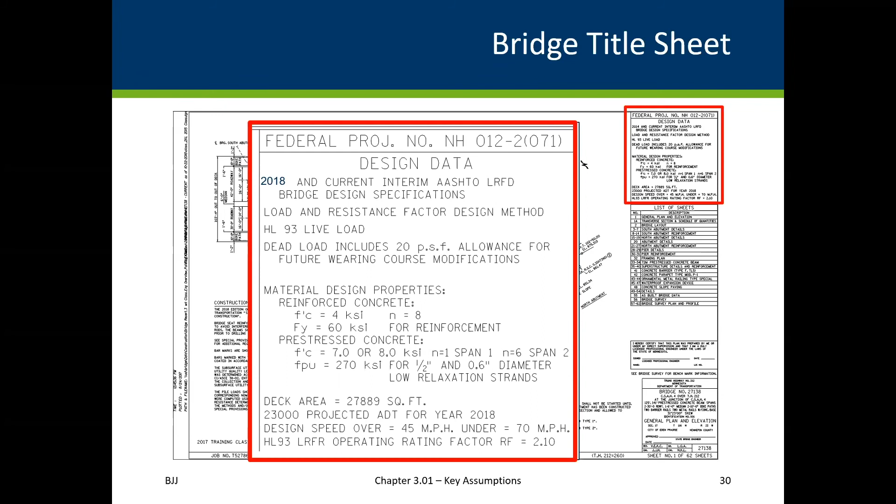Another thing we show on the plans of some bridges is a deck pour sequence. Deck pour sequence is important to the design of some bridges, in particular steel bridges. Pouring the deck at different times can affect stresses that get locked into the structure. It can also have an impact on the deck and amount of cracking that it might get if done out of the sequence shown in the plans.

The amount of camber built into the steel girders is also based off the assumed deck pour sequence shown in the plans. Deviation from the deck pour sequence shown in the plans will impact camber. In some cases, this can be significant. So a proposed change in deck pour sequence may be required prior to fabrication of the girders.

Another example where a construction sequence may be shown in a plan is for steel girder erection. Deviations from the assumed construction sequence may be allowable, but they must be analyzed to ensure the design is still adequate under the proposed sequence.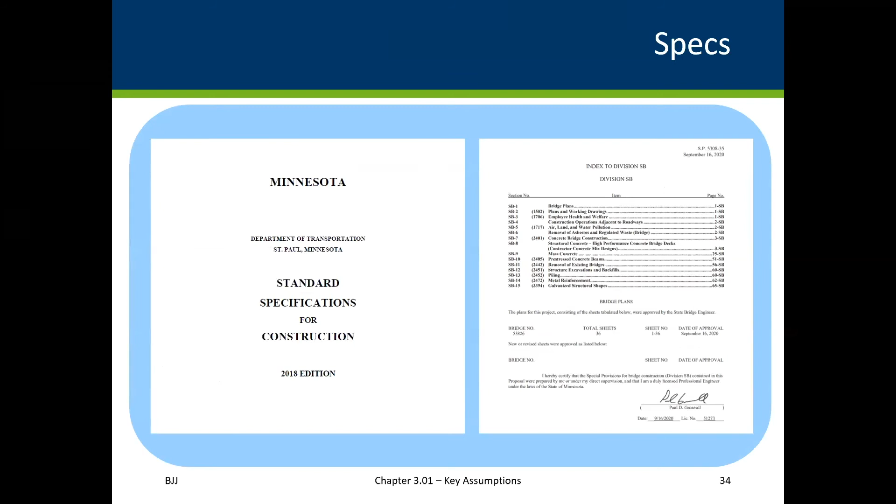The final consideration that I want to emphasize is to follow the standard specs and special provisions for the project. Many items in the specs are there to ensure that the design criteria are met and to help reduce variability in materials and construction.

That I don't know if any questions came in. Yeah, I don't see any questions came in on the chat box. Anybody have any questions? I can look at the attendee thing. Anybody have your hand up? So I don't see anything. Anybody? You can either do the raise your hand thing or type in the chat, but it doesn't look like any.

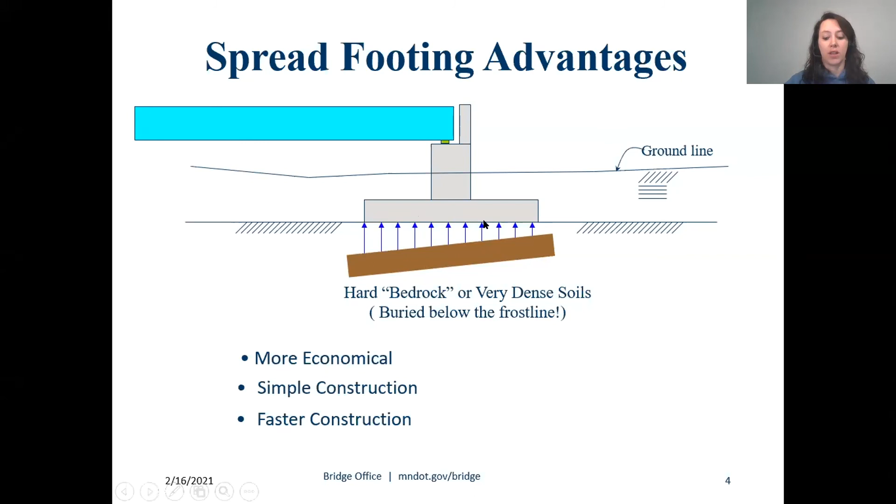So here you can see why construction is much faster. There have been examples where the contractor excavates to the bottom of the footing, sets the forms, has a cage of rebar that they swing into place, and pours that concrete all in the same exact day. So spread footings can really accelerate the work.

However, there can be a lot more risks involved because spread footings are generally just sitting on the ground. We really don't want that footing of our bridge to move, whether that's sliding from some lateral load, settlement from the soils condensing below, or undermining of the footing from a storm event in its final condition or during construction. So we need to make sure that we have solid ground under our spread footings.

So during construction, make sure that you have the correct soils. Are you actually seeing what the plan stated you would see? Verify that that spread footing doesn't have any uneven settlement or movement. If the soil report says you're supposed to be seeing sand and you're seeing topsoil, clay, or peat, you're not going to want to continue. We might not be geotechnical engineers, but we need to be able to identify when something has changed beyond what was called for in the plans.

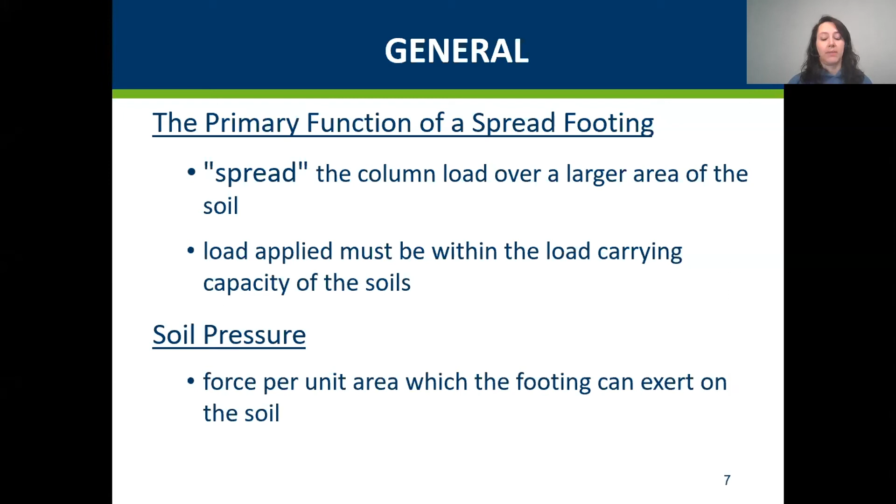The other major foundation type is pile-supported footing. Piles are used when the underlying bearing soils are not adequate to support the loads for a spread footing. Most likely this has been identified in the plans, but if the plans include spread footings and the inspector notices some very weak soils, you must inform the bridge office for assistance and potential change of foundation type. Remember, a short delay now may save huge issues at a later date if significant settlement were to take place.

Some advantages to a piled footing: as I mentioned, we use pile footings about 90% of the time, so most of our existing bridges are on piling, and we have had very little serviceability problems with them. Piling is used whenever the soils at and below the bottom of the footing are too weak or too compressible to provide a stable foundation for a spread footing.

We have had less field risk with piled footings. They can be used in those areas of high risk with weak soils or where there is danger of erosion or scour, such as in streams. And piling provides us a much higher load capacity, so if we have a heavy bridge, we can have a smaller foundation by distributing that column load to strong piles.

Some additional advantages of deep foundations: if that bottom of that footing is scoured out, the piling still holds that footing in place, whereas if this were to happen to a spread footing, it would settle to that new ground line.

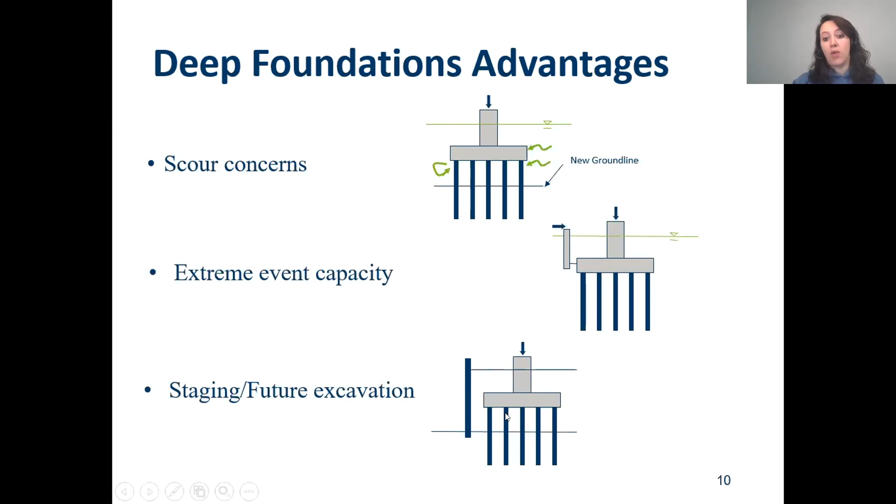A pile is generally a shaft of steel, concrete, or steel and concrete driven into the ground to transfer that structural load through weak soil to soil capable of supporting the bridge load. Keep in mind that foundation support is very important, as the best built bridges on a poor foundation will have a shortened lifespan.

In the interest of time, I'm only going to discuss our two most common piles. The first is called cast in place piling. CIP piles are driven as steel shells and then filled with concrete later. They are the most common type of piling used on bridges at MnDOT, accounting for about 70% of piles driven.

As that pile collapses, it takes a certain amount of energy to bend that piece of steel, and that energy is used up bending the steel rather than sending the hammer back up. So you don't get near as much bounce back up. When out in the field, watch for this. As the pile is collapsing, the hammer will only go back up a few feet, but then when it comes back down, it doesn't have enough energy to bend the pile, so it bounces way back up. You don't get that even pattern while driving; you get a short stroke followed by a long stroke.

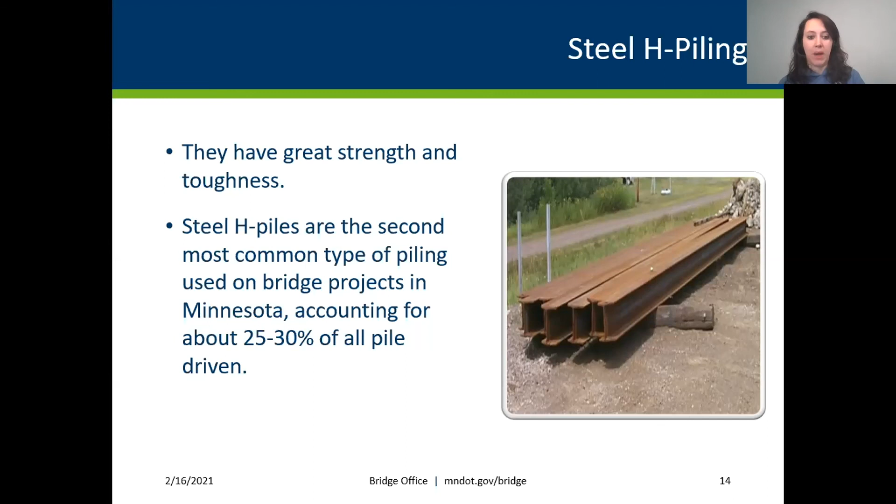Piling has two different types of functions you'll see in the field. There is end bearing, which is the pile we use when driving to a very dense layer or rock. Then we have what we call a friction pile, which is a displacement type pile held in place by friction between the surrounding soil and the pile.

End bearing piles are piles where the tip of the pile is driven to bedrock or even a short distance into a hard or dense layer adequate to carry the design load without relying on friction. Almost any type of pile can be used as an end-bearing pile, but because of their high load carrying capacity and ability to penetrate relatively dense soil, the steel H pile is often selected. Cast in place piling can be used as an end bearing pile when they can reach that required tip elevation without concern of bending or buckling the pile or running into rocks or boulders.

Friction piles are usually displacement piles, which obtain most of their load carrying capacity through friction between the soil and the skin of the pile. This load is called skin friction. Generally, friction piling develops lower pile load capacity since it doesn't have that end bearing resistance and is just relying on friction. It can be harder to predict the ultimate capacity of the pile because it's based on the surrounding soil. The most common friction pile you'll see is the CIP pile, but the H pile is also sometimes used as a friction pile, especially when soil boring indicates there might be presence of rocks or boulders.

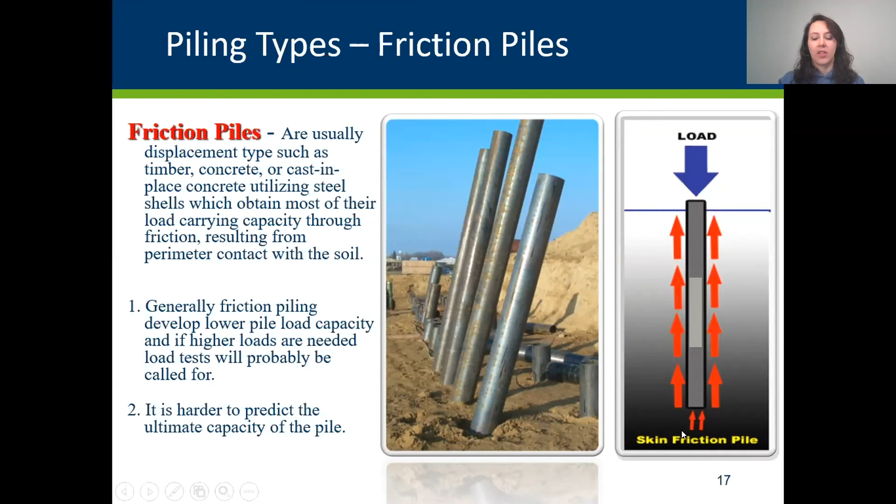The diagram on the right shows how friction piling works. As you can see, the majority of the resistance up to this load is on the edges of the pile rather than at the end. So this load on the side is larger, and the load at the end of the pile is either zero or very minimal.

So now we're going to go through a few miscellaneous topics related to foundations. The first is a quick reading of soil borings. In your bridge plans, usually at the back pages, you'll see a sheet with the soil boring results taken. They're taken as close as possible to where the substructures were expected to be located before the design even started.

So a super quick lesson on how that data is derived on the plans. How is the SPT N value, or rather the standard penetration test N, which is the number of blows, determined in the borings? A 140-pound hammer is dropped 30 inches, and the blow count is counted for that drill rod to advance 18 inches. The first 6 inches is discarded, and the next 12 inches count is what's recorded. So the N value is the recorded blow count needed to advance that 12-inch interval of soil, and it can be correlated to help characterize the soil type.

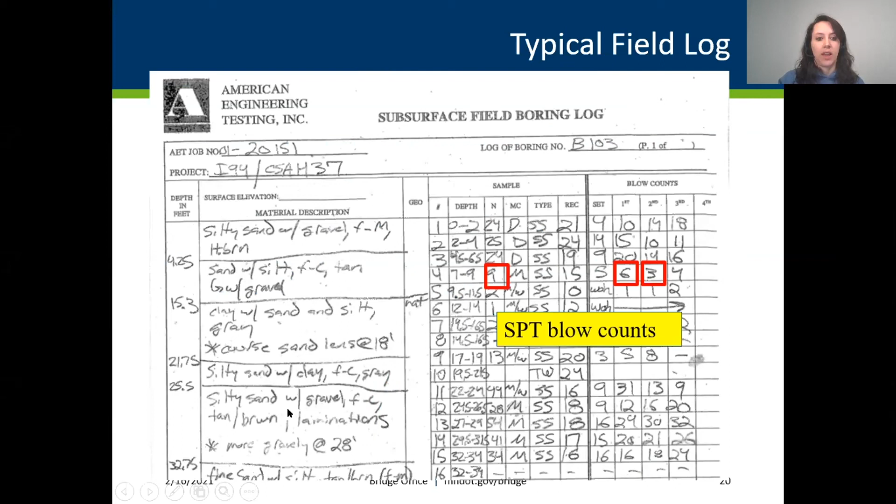This boring log is the final product of the soil investigation, used to determine the most suitable foundation type. So this is what we're expecting to see in the field. This boring log provides a little more information than what might be shown in the plan, but as you can see, it has the soil classification and blow count information here.

It also has the water table level identified on this boring log, and that can determine, along with the expected ground line, whether we need dewatering measures or not.

So next, we're going to have a very quick lesson on soil types. It can be beneficial to have at least a minimal understanding of the properties of different types of soils so you can make sure the soil under your spread footing is suitable for that type of foundation, or that your end-bearing pile isn't hung up in soft soils.

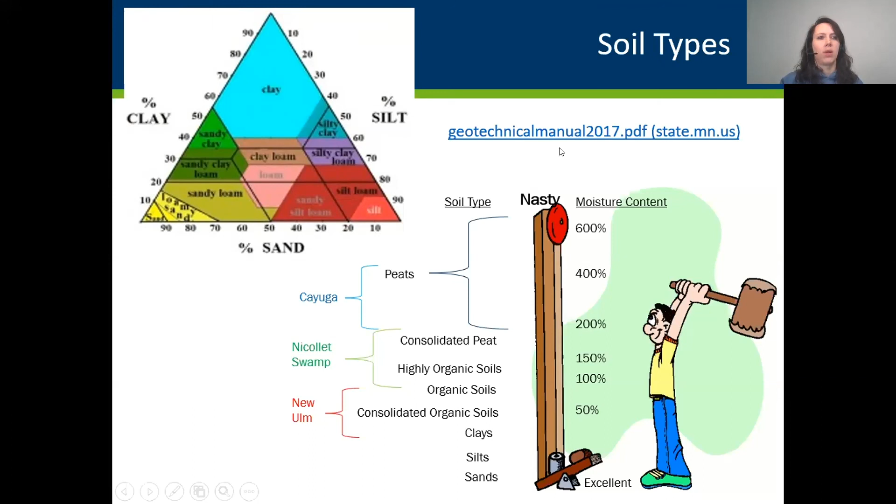So if you have questions regarding soil types, you can check out the Geotech manual online, which I've got stated right here, or contact the foundations unit.

When a footing is to be placed on a recently constructed fill or one of considerable height, review the special provisions or plans, as they may require a waiting period or surcharge due to settlement of these soils. There are 3 different types of settlement, and the type depends on the types of soils.

The first is immediate compression. This happens quickly and occurs mainly in sandy soils. You push down on it and it gets rid of all the air pockets, similar to a sponge.

The second type of settlement is called primary consolidation. This normally occurs in clays and takes longer than immediate compression because it's the result of water being squeezed out. You can speed up that removal of water by installing wick drains, which I'll explain in a second.

Then lastly, we have secondary compression. This is caused by creep, and it usually takes several months to years to happen. So sometimes you need to add a preload or a surcharge to improve that weak compressible soil.

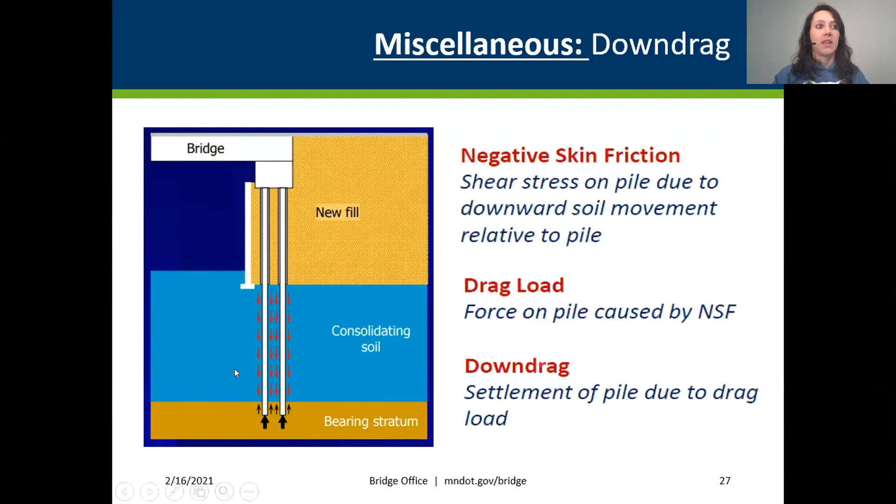So drag load is the force on the pile caused by negative skin friction, and down drag is the actual settlement of that pile due to that drag load. So typically it's recommended that piling should be installed after the surcharging has occurred.

Some methods for dealing with down drag: you could use a larger H pile section to increase factored structural resistance for piles. You could use more piles to reduce the applied load to these piles. Or you could reduce the soil settlement that occurred after pile driving by preloading or using wick drains, or both.

So really the takeaway here is that you should understand what causes down drag and why we consider it in design. Sometimes a contractor wants to drive that piling, then start surcharging without considering the ramifications of it.

All right, so the next miscellaneous topic is pile setup. When a pile is driven into the ground, it disturbs and displaces the soil. As the soil surrounding that pile recovers from the installation disturbance, a time-dependent increase in that pile capacity often occurs. This is referred to as setup.

You're displacing the soil by pushing this tube down it, and with sands, that soil kind of goes right back to where it was immediately. But with stiff clays, it can take a while before that soil kind of comes back and fills up all those voids around the pile.

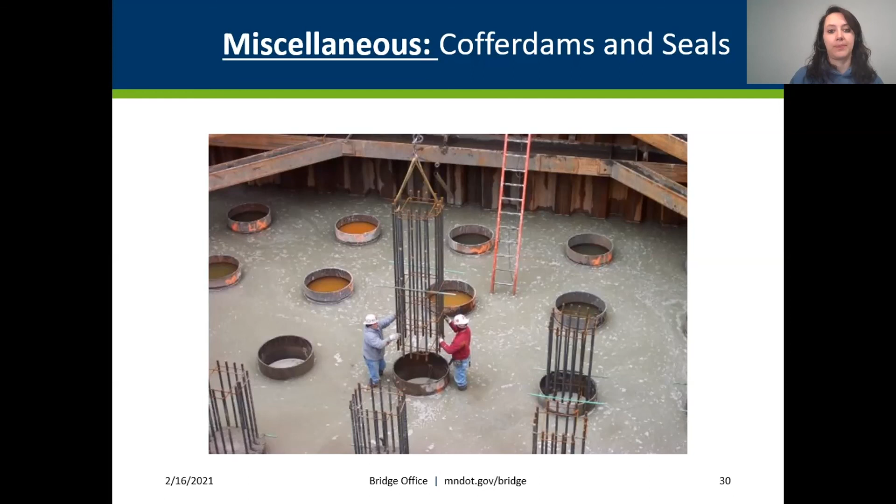And this is what happens when you ask someone to review your PowerPoint for you. They insert pictures of seals.

So I'm not talking about the singer or the animal, but I'm talking about the concrete seal that might be needed at the bottom of a cofferdam to seal the cofferdam before they start pumping water out of the cofferdam.

So the seal has two purposes. It's to act as a barrier against inflow of water and saturated soils caused by the hydrostatic pressure of that water coming from outside of the dam. And then it can act as a frame, providing strength for this cofferdam.

Concrete seals are specified in the plan when it is anticipated that a cofferdam cannot be safely dewatered to the bottom of the footing elevation.

And the seal thickness will then depend on the depth of water above the bottom of the seal, because a concrete seal is designed to resist that hydrostatic uplift with its mass.

And then lastly, we have a drilled shaft. A drilled shaft is a deep foundation that we don't see very often, but it's a cylindrical excavation in soil or rock that is then filled with reinforcement and concrete. They are used when we have a bridge with very high load capacities, more commonly seen for river crossing bridges as they can be constructed to depth below the predicted scour elevations, even in very dense soils or bedrocks. These casings are sometimes pulled out, but they're there to act as a form for the rebar and concrete.

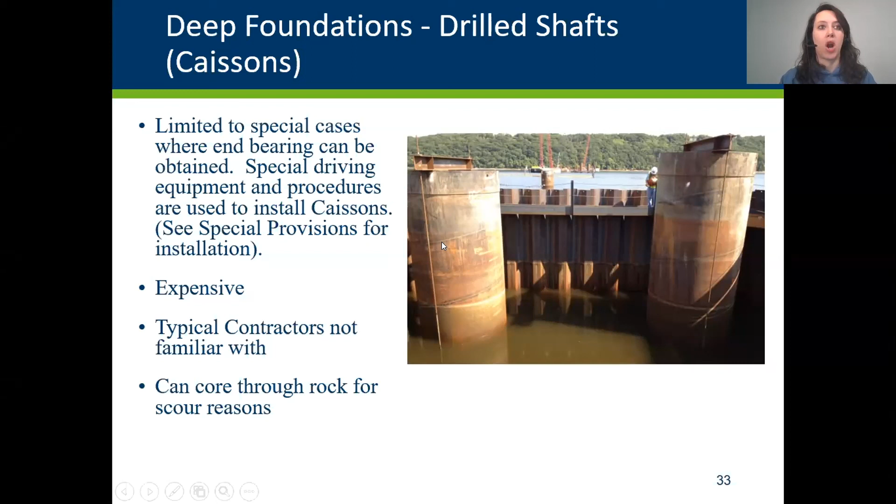Drilled shafts are commonly constructed by employing rotary drilling equipment to drill the cylindrical hole. Then a rebar cage is inserted into that hole and filled with concrete.

So I know that was a lot of information really fast, but we wanted to touch base on a few common items that you might deal with in the field. So with that, are there any questions? Again, it looks like nothing came in on the chat that I see, and I looked earlier if anybody had their hand raised. Let me scroll through again to see if anybody wants to talk. But does anybody have any questions for Ashley?

I have a question, this is Mark. Are the Packers going to win the Super Bowl next year? Yes. Sorry, all you Packer backers. I don't know how we are with our mix of people here, but if we could come through the screen, we might. I just saw something - the only way to keep Tom Brady from getting another ring is to have him dressed up in a Vikings uniform. I saw that too.